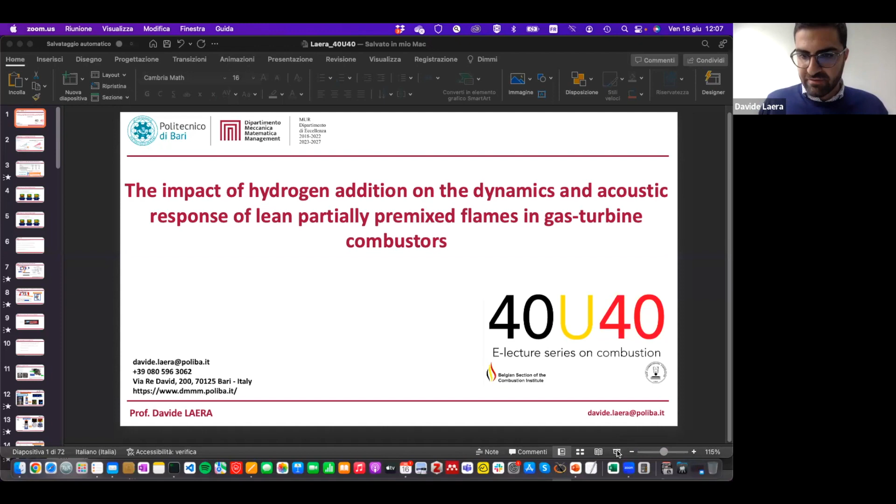Before starting sharing my screen, I would kindly thank Alessandro and Bart for the invitation for giving this seminar. So tell me if everything is all right. I'm sharing the screen, do you see one screen? Yep, everything's okay, audio is okay? So far, so good. Perfect, so I think we can start.

Good morning everyone. As Salvatore said, I'm going to present you 50 minutes of talk on the impact of hydrogen addition on the combustion dynamics and acoustic response of lean premixed, partial premixed flames in gas turbine combustors. So briefly, we are going to talk about thermoacoustics today.

I don't think I have to really tell you why nowadays we are talking about hydrogen combustion. If we see the plots on the prediction of the emission of greenhouse gases, which you can easily find online, with a focus on aviation or global emission, you can clearly see that if we want to meet the carbon neutrality European target by 2050, we definitely need a change of paradigm in combustion systems. We need really to reach carbon neutrality.

One way to do that is to move to a carbon neutral fuel such as hydrogen, considered nowadays one of the most promising solutions. The problem is that if we compare the thermochemical properties of hydrogen with classic hydrocarbons used in gas turbine systems, such as methane or kerosene, we can clearly see that hydrogen has completely different properties. In particular, hydrogen is characterized by high flammability limits, higher chemical reactivity, meaning higher flame speed, and low density. This introduces a technology challenge.

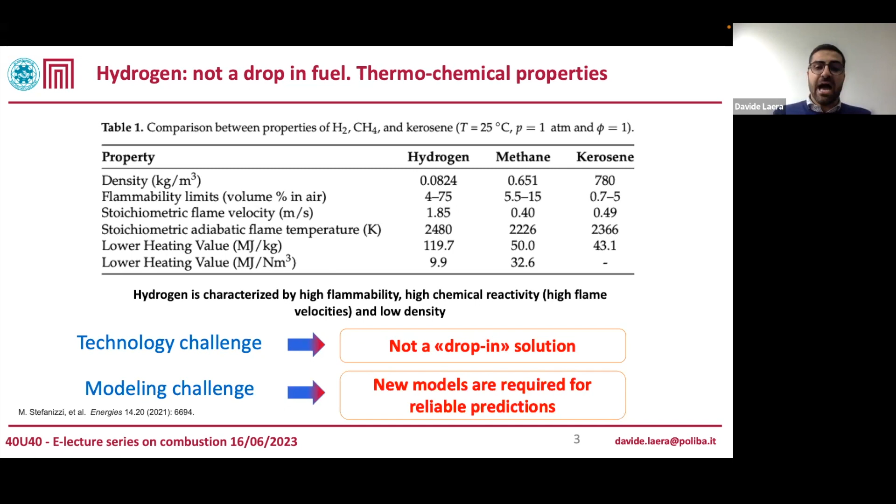Hydrogen is not a drop-in solution. For people like me who have spent my career doing modeling and simulation, the fact that we want to modify the fuel and use hydrogen in a combustion system will also introduce a modeling challenge. So new models are required to be developed in order to have reliable predictions. In general, hydrogen is not a drop-in solution.

So what will be the impact on an engine if you use it? Definitely we are going to have modifications in the flame shape, thermal load, and emissions. We need to rethink ignition problems, LBO or flashback, and also some instability problems of the flame, such as thermoacoustic and intrinsic instabilities. Of all these problems, today's talk will focus on thermoacoustic instabilities.

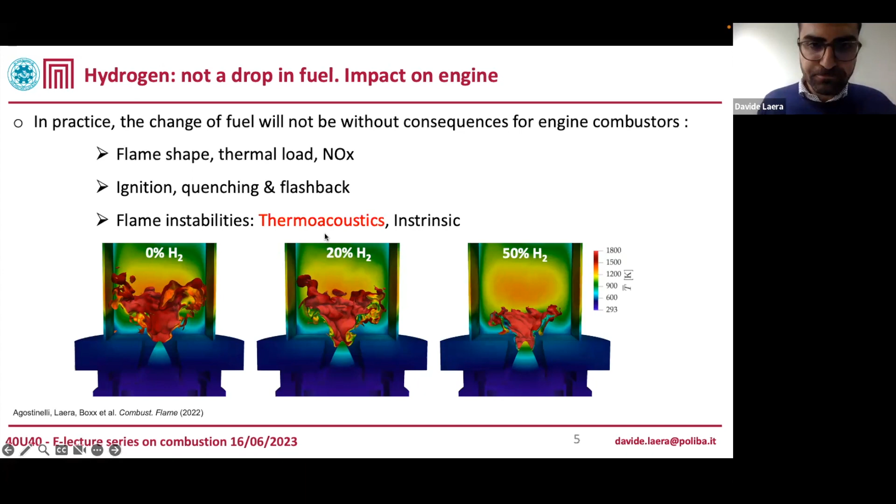So this is the outline of my presentation. First, I will briefly do a theoretical recap on what thermoacoustic instabilities are, a really peculiar problem of combustion systems. Then I'm going to focus on the use of large eddy simulation as a predictive tool for thermoacoustic instabilities. The focus here will be more on which are the challenges and what are the requirements for an LES to be a good predictive tool for combustion instabilities.

I'm going to present a couple of simulations that I performed when I was at CERFACS, on two different test rigs: the premixed combustor from DLR and the Miradas MFT, where these two test rigs have not been operated with pure hydrogen conditions, but where hydrogen was added.

The focus will be on the impact on combustion dynamics of adding hydrogen. Then some final remarks and ongoing projects.

So, thermoacoustic instabilities. In order to explain thermoacoustic instabilities, let's first consider a sketch of a gas turbine combustor. In this sketch you will have a plenum, an injector, a combustion chamber with a flame. Let's imagine that for some problems, we have heat release rate fluctuation, so an unsteady combustion process inside the combustion chamber.

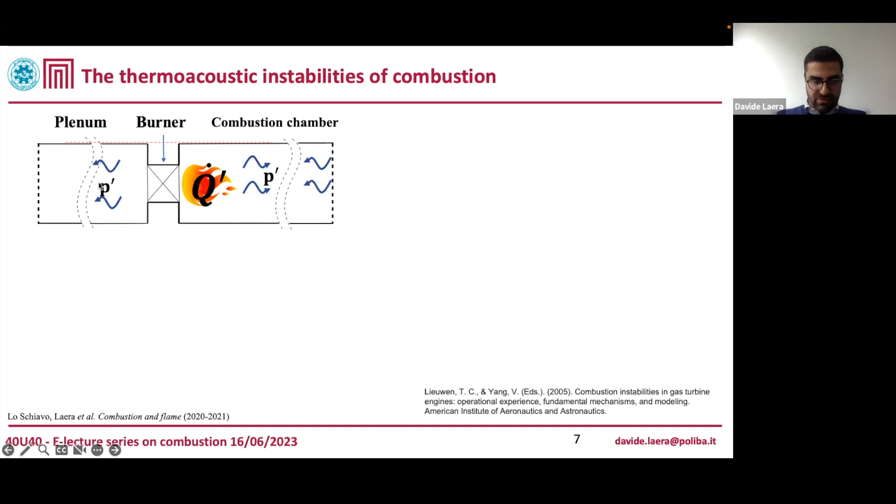When you have heat release rate fluctuation, what will happen is that you will generate acoustic waves. These acoustic waves will propagate downstream and upstream of the combustor in the plenum and the combustion chamber, will encounter the outlet and the bounds of the combustion, and will be reflected back in the combustion zone.

The acoustic wave here may directly or indirectly interact with the combustion process. Then new heat release rate fluctuation will be generated, and this system may self-sustain, leading to thermoacoustic instabilities.

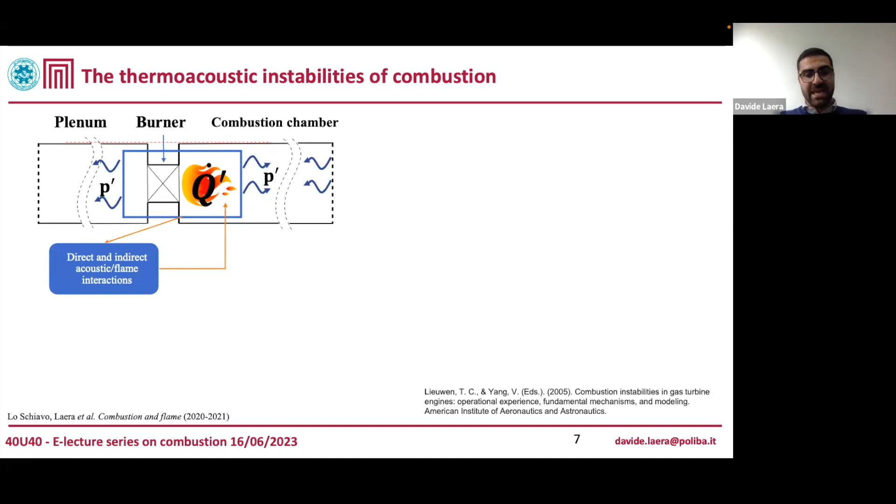Let's now have a focus on how the acoustic wave can interact with the combustion process. Here I'll talk about direct and indirect acoustic flame interaction. We can mention some of the mechanisms. For example, we can consider that the acoustic wave will impact the injection and the mixing system.

For example, in a perfectly premixed flame, the presence of acoustic wave may lead to mass flow oscillation, which will result in oscillation of the heat release rate.

For a partially premixed or technically premixed flame where air and fuel are injected separately, the presence of acoustic wave may lead to fluctuation of fuel and air mass flux, generating equivalence ratio fluctuation, which will lead again to heat release rate fluctuation.

In a system where we have a spray, so when we operate with liquid fuels, what may happen is that the acoustic waves may couple with the evaporation process of the liquid droplets and again generate heat release rate fluctuations.

Today, I'm not talking about liquid fuel. Interested people can have a look at a couple of recent publications that we have performed on spray flames and thermoacoustics. Here I put the reference.

The acoustic waves can also interact directly with the flame itself, for example, leading to flame surface variation. That, as you all know very well, if you are...

...proficient in combustion, this will lead to fluctuation of the heat release rates, or may couple also with the hydrodynamic fluctuation of the system, which may then interact with the flame, generating, for example, vortex and flame interaction, flame tip roll-up.

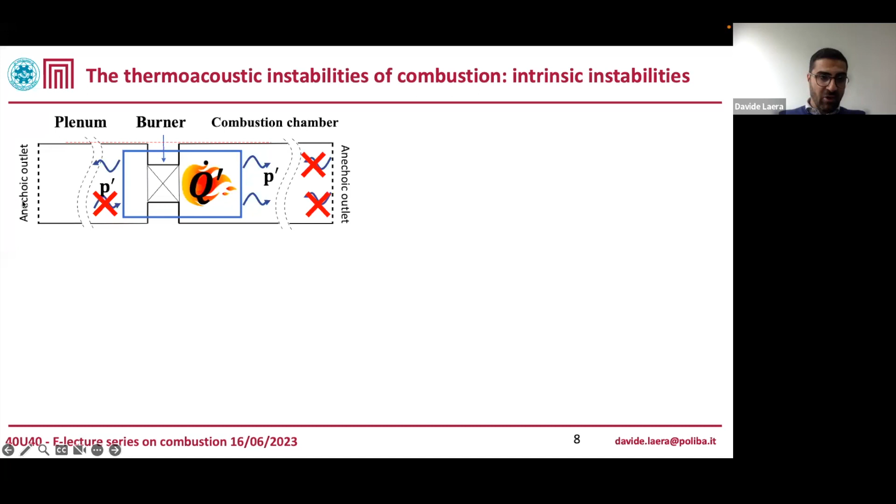...you have an anechoic outlet, and that is because basically the loop of acoustic wave flame interaction happens inside the flame itself. The acoustic waves that are generated by the flame will propagate upstream.

They will encounter the injector, and they will be reflected directly back on the flame. This may generate some acoustic instability that does not depend on the geometry of the system, so that's why they have been called...

...intrinsic instabilities. This phenomenon has been almost discovered at the same time by researchers from TU Eindhoven and from Munich.

Interested people in these interesting thermoacoustic instabilities may refer to a very thorough lecture that has been presented by Professor Polifke, which I moderated during the combustion webinar organized by Georgia Tech. I leave you here the link of the recording, the YouTube link. And very recently, Dr. Silva from TU Munich has published a comprehensive review on such phenomena.

In this talk, I'm not going to talk about intrinsic thermoacoustic instabilities, but instead I'm going to talk about classic acoustic-driven ones.

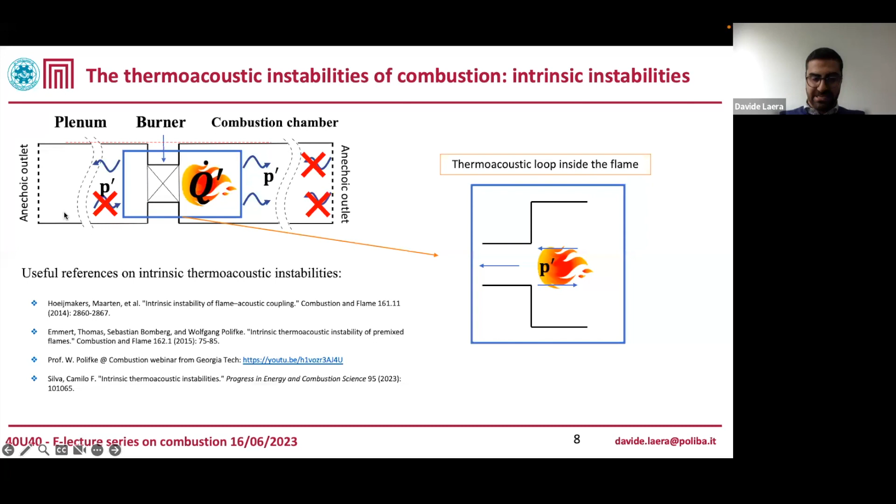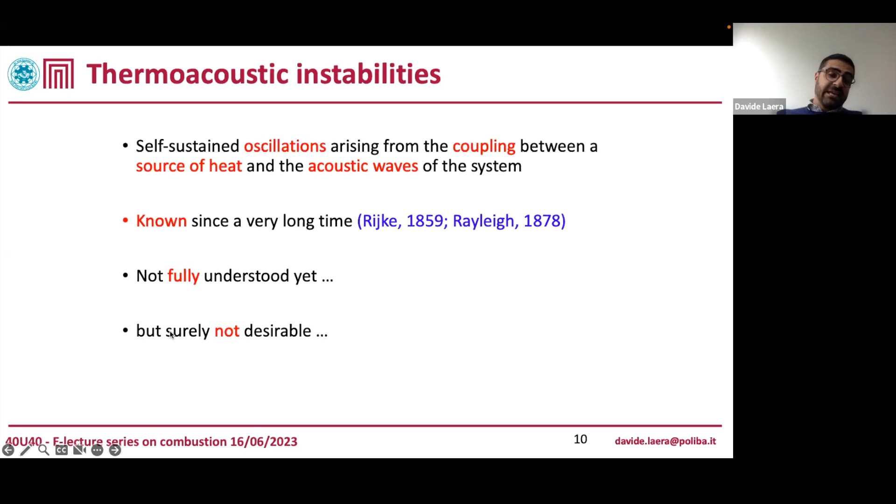That is because what are the harms of combustion instabilities? Combustion instability is definitely a source of combustion noise, not the only one, but the most important one. They may generate high levels of pressure fluctuation that will cause structural vibration, component failure, as you can see here, or they may lead to unwanted combustion instability phenomena such as flashback and blow-off.

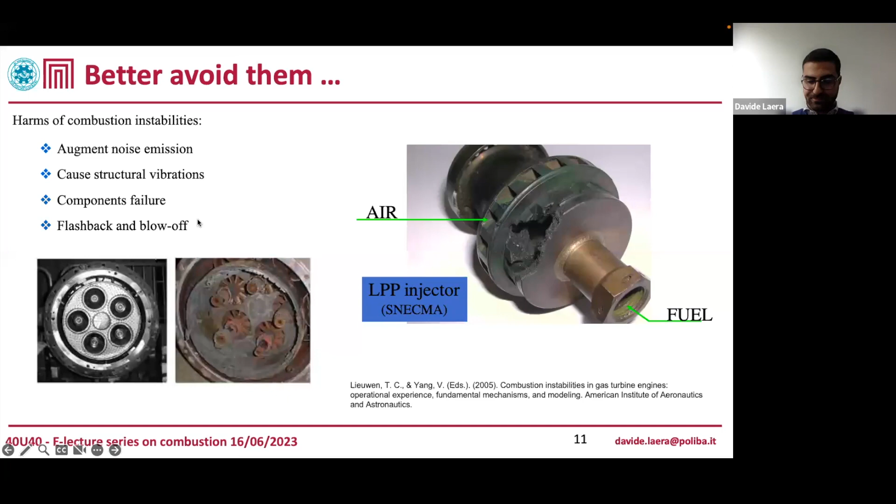So the question of today is: what happens if now we add hydrogen in our system? During this talk, I'm going to present two configurations in which hydrogen has been added, but in a completely different manner.

The first one is the very famous PRECCINSTA combustor from DLR, where very recently Isaac Boxx and Ianko Chterev have performed some hydrogen testing campaigns. In the PRECCINSTA combustor, the hydrogen has been added fully premixed with the methane upstream of the combustor. Basically, inside the combustor, the methane and hydrogen are injected upstream, then mixing up and a partially premixed flame is stabilized inside the system.

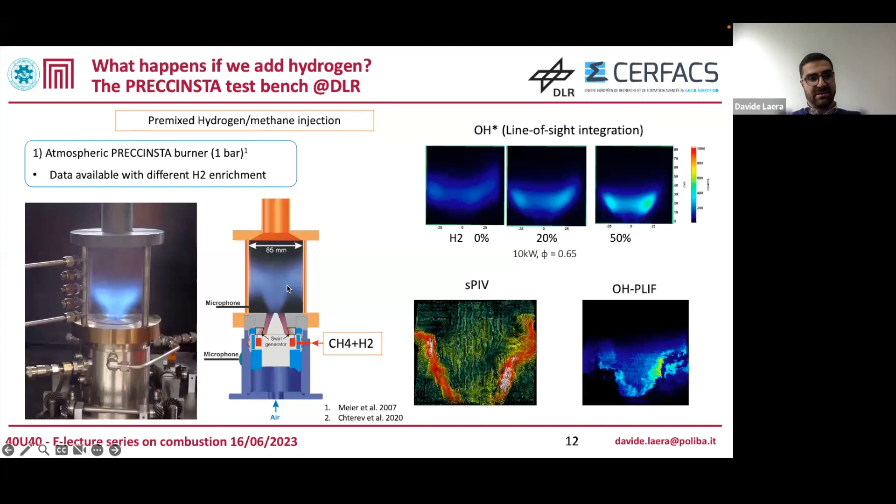The problem is that in the PRECCINSTA combustor, as soon as hydrogen reaches the combustion chamber, a thermoacoustic mode is triggered, as you can see from this simulation. We're going to discuss this later on in the presentation.

The second test rig that I'm going to talk about is the MIRADAS test bench, which has been designed, operated, and developed at IMFT in Toulouse in the framework of the SCIROCCO ERC project. Why is it interesting also to discuss the MIRADAS test bench?

This is because, differently from the PRECCINSTA combustor, here hydrogen is not injected fully premixed with methane. Instead, there is a pilot line of pure hydrogen; a really small quantity of hydrogen is injected at the base of the flame root through this pure hydrogen pilot line. So in this case, hydrogen is not premixed and is injected at the flame root.

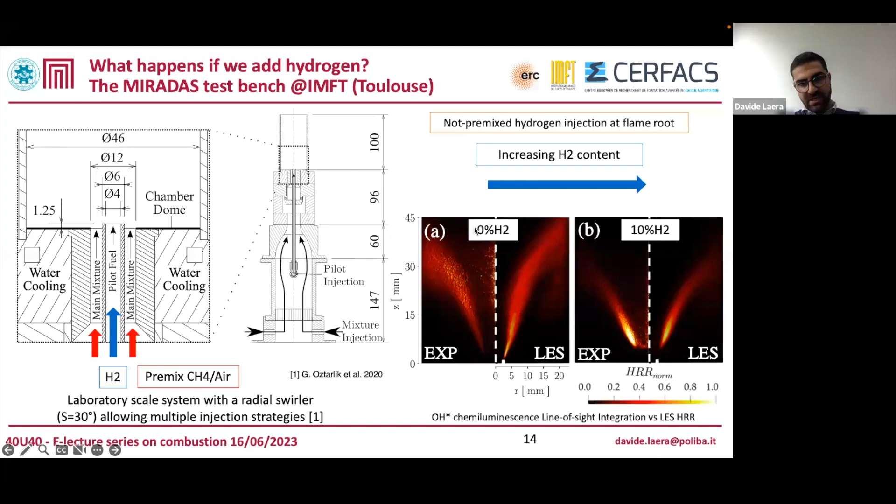Here you can see what happens at the flame when we pass from 0% hydrogen—this is the pure methane case—to 10% of hydrogen at the flame root.

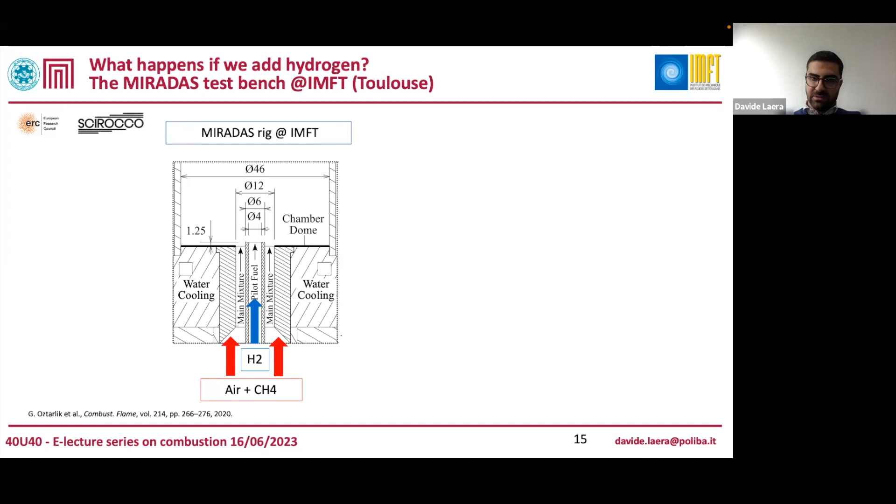If we now talk about instabilities, I have a video that I think we can stop here.

So as you have seen, we have an unstable flame when operated in pure methane, that is stabilized as soon as a little amount of hydrogen is injected at the flame root.

What you can see here is that in both test rigs, hydrogen has been added. In one case, hydrogen led to the triggering of instabilities. In the other case, hydrogen helps the stabilization of the flame. So what is happening here?

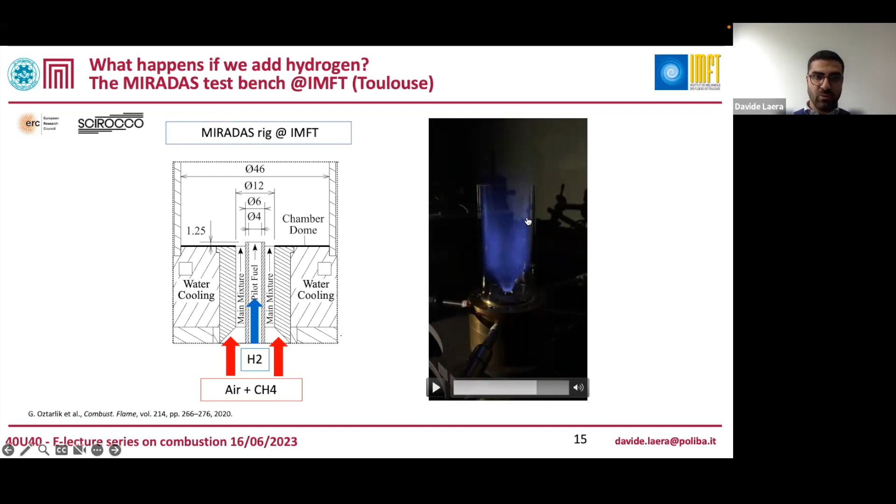If we want to study this problem from a numerical point of view, a modeling point of view, it is a quite challenging problem. That is because thermoacoustic instabilities, if you have correctly understood, is a multi-physical problem. You have to deal with acoustics, fluid mechanics, combustion, and dynamical systems.

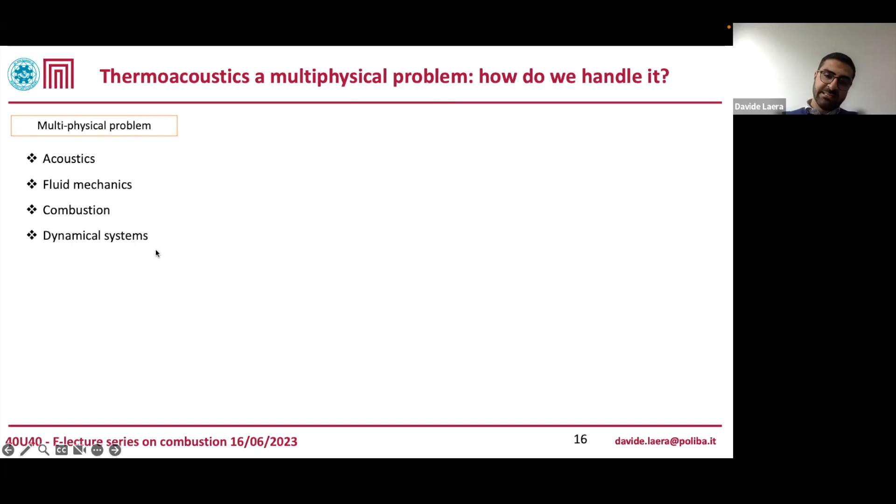Over the years, multiple approaches have been developed in order to study thermoacoustic instabilities, and they can be grouped into two major groups. The first is the acoustic approach, where we study the problem from the acoustic point of view using an acoustic solver, where we can use 2D or 3D modeling—that's not important, the concept is the same. We solve the acoustics, and the flame inside these models is considered as an acoustic element, only considered as a source of acoustic waves.

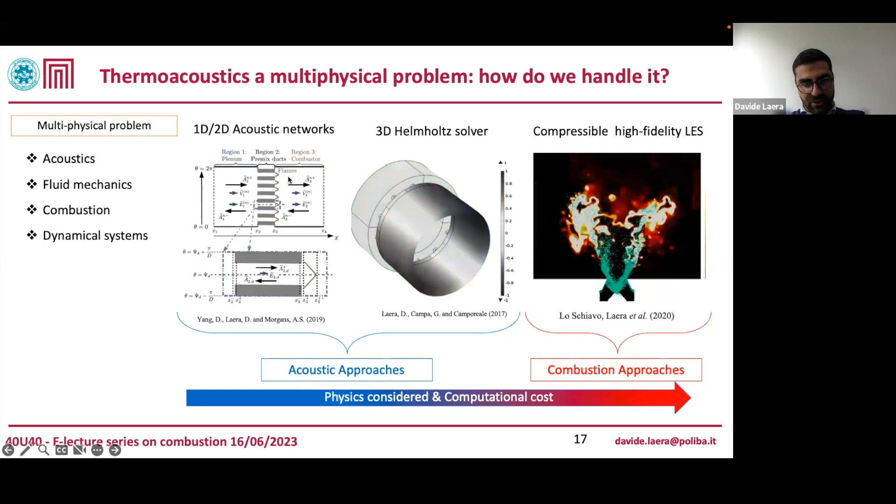On the other hand, we have compressible LES simulation that can capture all the physics that I've listed here, of course at the price of a higher computational cost. Today, we are not talking about the acoustic methods, which was the objective of my PhD thesis at Polytechnic University of Bari, but we are going to focus more on how LES simulation can be used to study thermoacoustic instabilities.

All the simulations that I've performed today have been performed using the high-fidelity compressible solver AVBP, which is quite famous in the community. It's developed at CERFACS, and it resolves the reactive, fully compressible Navier-Stokes equations with a high-order Taylor-Galerkin scheme, and it's been used for combustion problems, including thermoacoustic instability studies.

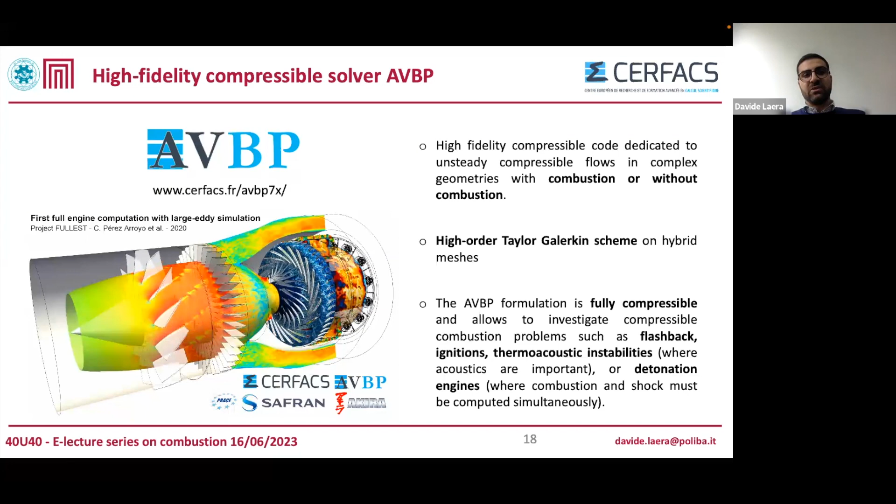Now, in an LES solver, if we want to understand which are the requirements needed in order to perform such studies, the first thing that we need to deal with is how do we account inside the solver for the chemical reactions, the chemistry.

Generally, we can classify the approach into groups: the flamelet generated manifold, or tabulated approach, where chemical reactions are pre-computed, tabulated as a function of, for example, a progress variable, and stored in tables recalled inside the system. Codes using this approach are computationally cheap, because you only need to resolve one more transported equation, that of the progress variable and its variance. The problem is that when you pre-compute the chemistry, you make strong assumptions.

For example, in the combustion regime, when you add hydrogen, as we will see in the Miradas combustor, we are going to face multiple combustion regimes where you have diffusion and premixed flame. So this can be a drawback. Furthermore, to consider complex effects such as heat transfer or stretch effects, these need to be computed in the tabulation that you perform.

Another approach, the one used in AVBP, is the finite rate chemistry approach. In a finite rate chemistry approach, you resolve directly the chemical reactions while computing the simulation, so the combustion regime, the enthalpy effect, the stretch effect are an output of the simulation. The problem is that since you have to add a transport equation for each species in your chemical scheme,

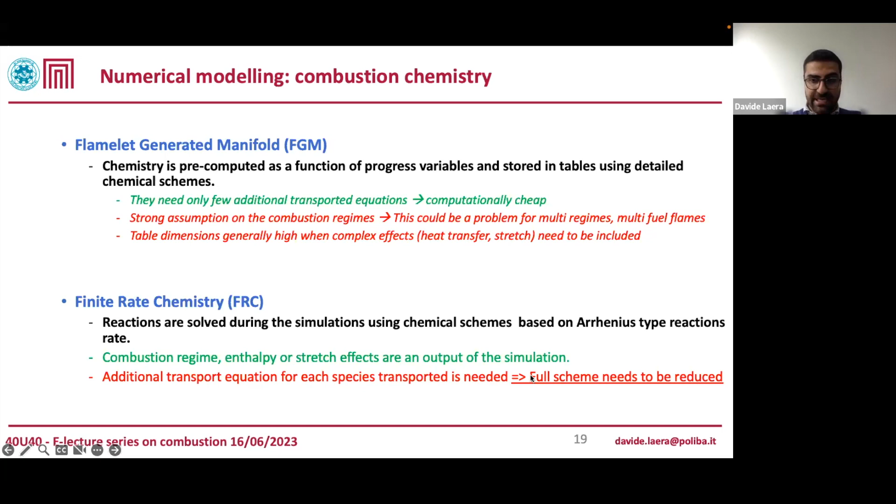you cannot use the detailed scheme. You need to reduce the chemical scheme that you require. So, in order to perform blends, hydrogen, hydrocarbons, methane simulations, one possible approach is to use a reduced scheme. This is the scheme that has been used for the calculation I'm going to present today.

It has been derived using the CERFACS-developed ARCANE tool. I leave here the references for interested persons. This scheme has been derived starting from the detailed POLIMI scheme developed by the CREC group in Polytecnico di Milano, which comprises 159 species and more than 2,000 reactions.

The reduced scheme at the end of the reduction process comprises 15 transported species, 9 in QSS, and 138 reactions. It has been validated for a range of premixed flames ranging from pure methane up to pure hydrogen, but here we go to 20% CH4 and 80% H2.

The second point that you need is turbulent combustion modeling. That is because in a premixed flame, in order to achieve stability in a code, if you have a finite rate chemistry approach, you need sufficient points to resolve the thickness of your premixed flame.

The point is that when you add hydrogen, the thermal thickness of your flame becomes shorter, so this may become computationally demanding. So you need a model.

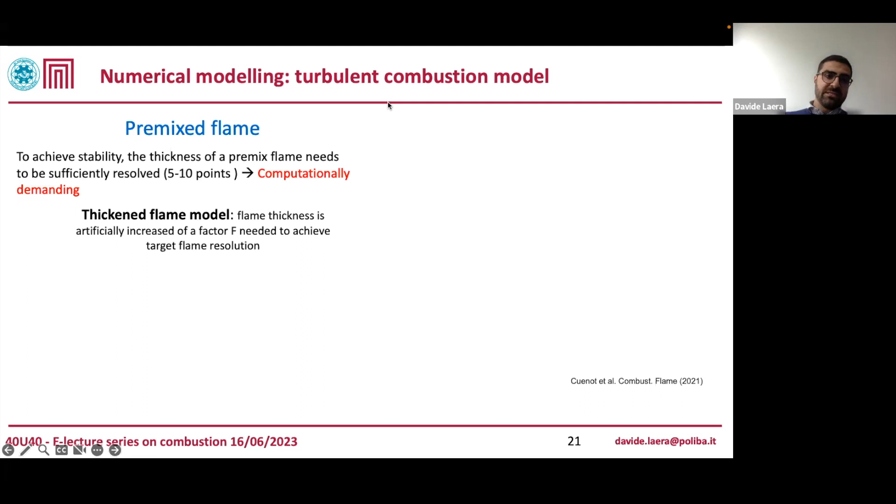The model that we use is the very famous thickened flame model. The thickened flame model basically uses properties of premixed flames, which say that the laminar flame speed is conserved if you divide the pre-exponential factor, so you divide your reaction rate by a factor f, and you multiply your diffusion coefficient by the factor f. You conserve the laminar flame speed, and you thicken the flame by the same factor f.

The problem is that an efficiency function needs to be introduced in order to correctly capture the flame-turbulence interaction, because you thicken your flame, so the response of your flame to the turbulence will be modified. This model is really famous right now. It's been implemented in multiple CFD codes, such as YALES2, OpenFOAM, Converge. You can find it everywhere.

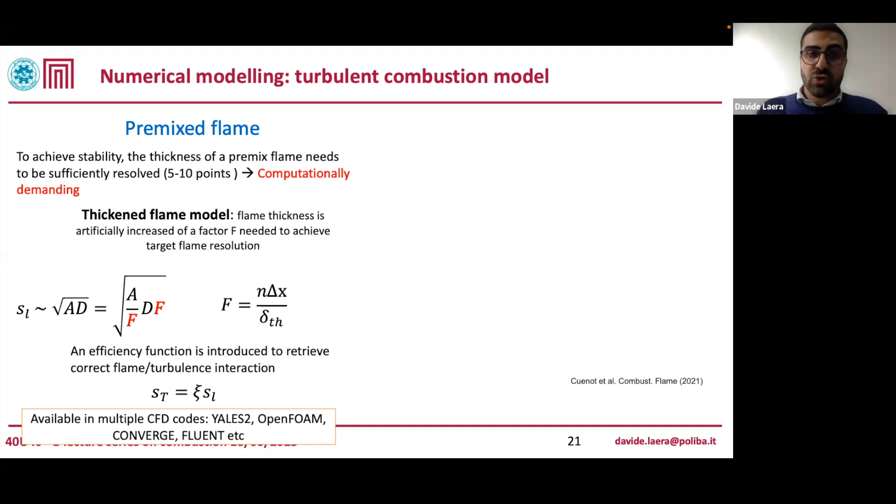As I said before, we may encounter multi-regime combustion, so we need to address diffusion flames as well. Diffusion flames, from a computational point of view, are less demanding. That is because the thickness of a diffusion flame will depend on the resolved velocity gradient on which you solve it. This means you don't need to thicken a diffusion flame because the flame will automatically adapt to your mesh.

The problem is that the reaction rate will depend on the scalar dissipation rate, so an under-resolved diffusion flame will lead to errors in your heat release rate. The solution is either to introduce turbulent combustion modeling for diffusion flames or to impose finer resolution.

In the simulation we're going to present today, we use the first approach. We detect the flame region using, for example, a Takeno sensor, and we apply the respective modeling, premixed flame model or diffusion flame model respectively, and then we choose the data at our disposal to validate our simulation.

When you're going to deal with hydrogen, you of course need to take really careful attention on transport properties. We all know very well that hydrogen species diffuse very fast. They have hydrogen characterized by a Lewis number that is of the order of 0.3 to 0.4.

So this means that you cannot do as you are used to doing with the methane flame, using the Lewis equal 1 approach. You need, for example, to account for differential diffusion of the species.

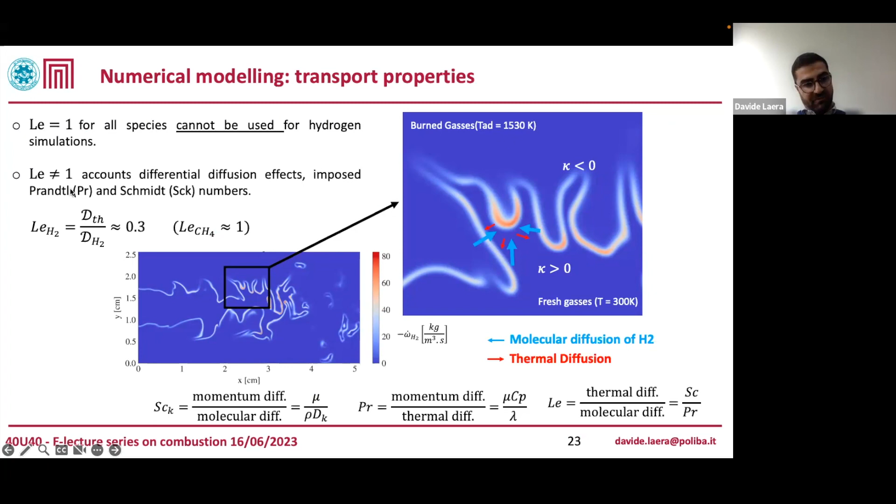...will change. So when tuning, as I said before, tuning your Prandtl number in order to match the correct value will work if methane and hydrogen are injected fully premixed.

But if they are injected separately, the transport property will depend on the local composition. Here you have two options: either use a full complex transport properties in your code, of course at the price of extra computational effort, or you can, as we have done in this publication, think of a simplified complex transport approach.

based on mapping, so mapping the value of Prandtl and Schmidt number of selected species as a function of local composition. The impact of this may be huge.

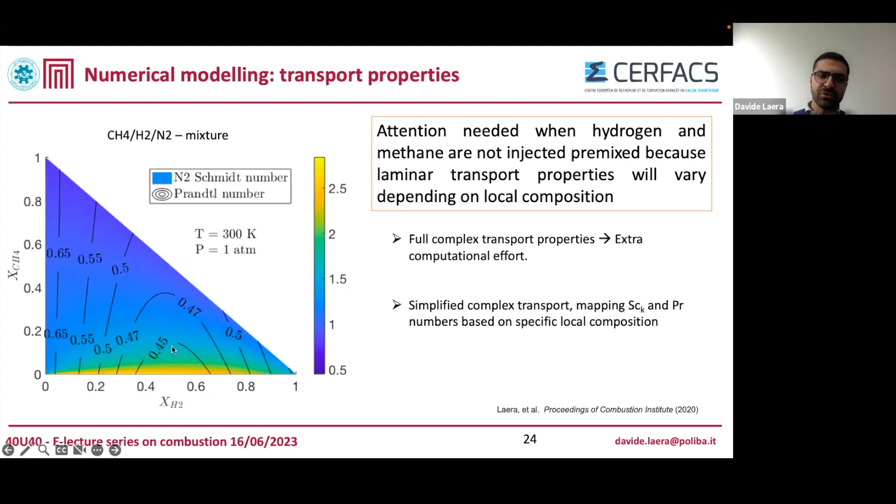For example, here are some results that show the variability, for example, of the Prandtl number in the Miradas combustor, where you have here hydrogen air, methane air, and the hydrogen is injected. As you can see, the variability of the Prandtl number is quite huge.

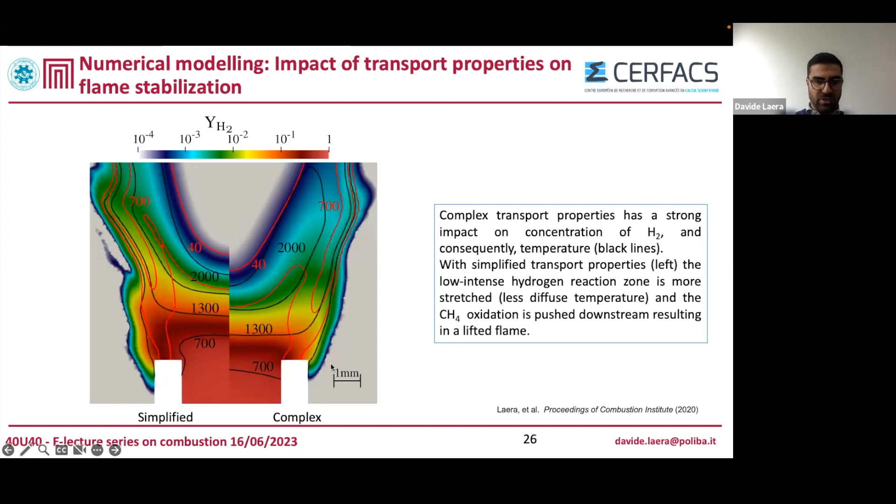Once we have fixed the combustion modeling, now we need to talk about boundary conditions. Generally, for LES or compressible solvers, we use a non-reflective boundary condition that has been derived by this famous paper from Poinsot and Lele.

When you don't want to deal with thermoacoustics, what you do with non-reflective boundary conditions is basically tune the parameters of your non-reflective boundary condition in order to...

...guarantee an anechoic boundary condition, so to avoid reflections inside the computational domain and guarantee stability.

When you want to study thermoacoustic instabilities, you cannot do that, because you need to have a reasonably correct acoustic impedance, because you need to capture correctly the acoustics of your system.

So if you use a non-reflective boundary condition like NSCBC in a compressible solver for self-sustained limit cycle calculation of thermoacoustic instabilities, be careful of the value you use for the relaxation coefficient, because, as has been proved in this publication from Selle, Poinsot and Nicoud...

...this will modify the acoustic impedance of the boundary condition. So you may modify the acoustics of your system, leading to wrong thermoacoustic predictions.

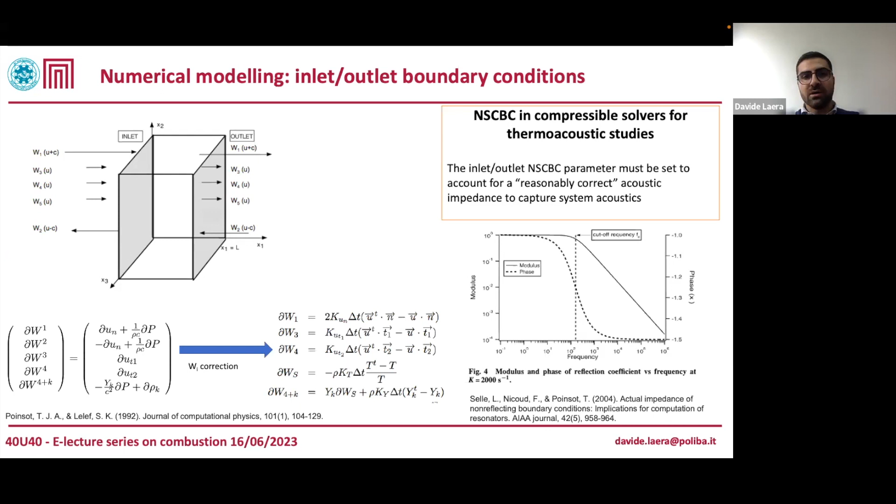Another key point for LES is the thermal boundary condition. So as you may know, for thermal boundary condition, we have multiple strategies. Okay, we can use adiabatic walls.

This is wrong, so it should clearly be avoided. We can impose the wall temperature at the wall.

So basically, in configurations where we have measurements, we can directly impose the temperature at the wall. The problem is that generally you do not have measurements in all your configurations, so this will work only on limited operative points.

Another possible solution to this problem is, instead of imposing temperature, to impose a heat resistance. Basically, with the heat resistance, you take into account the resistance of the heat conduction, convection, and radiation processes. So you do not impose directly the temperature, but the resistance at the wall.

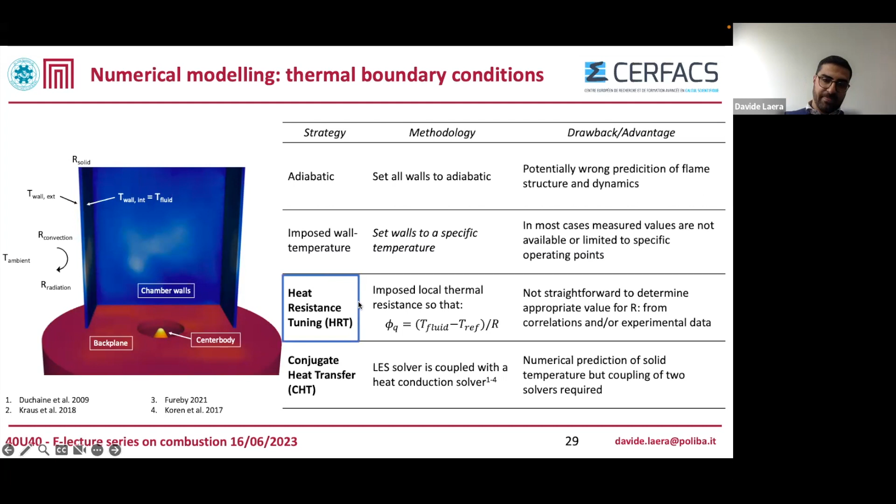If you hypothesize that the heat resistance will not change with temperature, you obtain a condition that does not depend on the specific operative condition at which you derived it. Of course, the last hypothesis is to perform a coupled conjugate heat transfer calculation. Today I'm going to talk about studies we have performed using these last two approaches.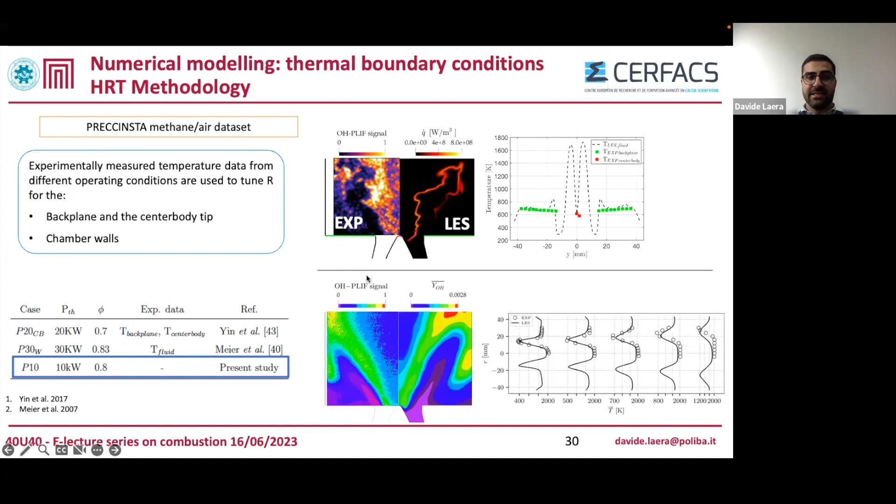Then we performed the simulation at the 30 kilowatt point, where we had temperature measurements on the wall, and we used this to compute the correct heat resistance for this boundary condition. Once we had that, we applied the two resistances in a third case where we had no measurements at all.

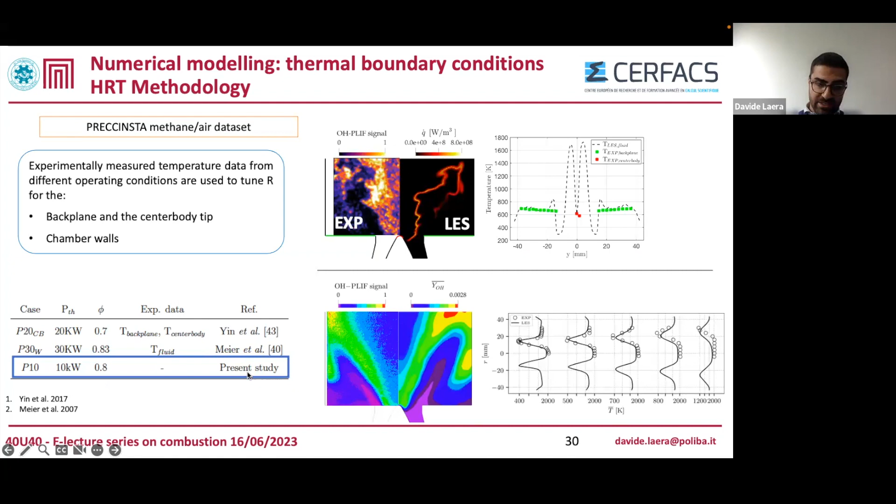As you can see, the application of the thin thermal resistance led to a flame shape that is reasonably matched. There are some mismatches—for example, it's a little bit shorter than the one observed experimentally.

Now, if you are not interested in thermoacoustic instabilities, your study ends here. The problem is that we were interested in thermoacoustic stability, so we had to see what was the impact of this thermal boundary on the system dynamics.

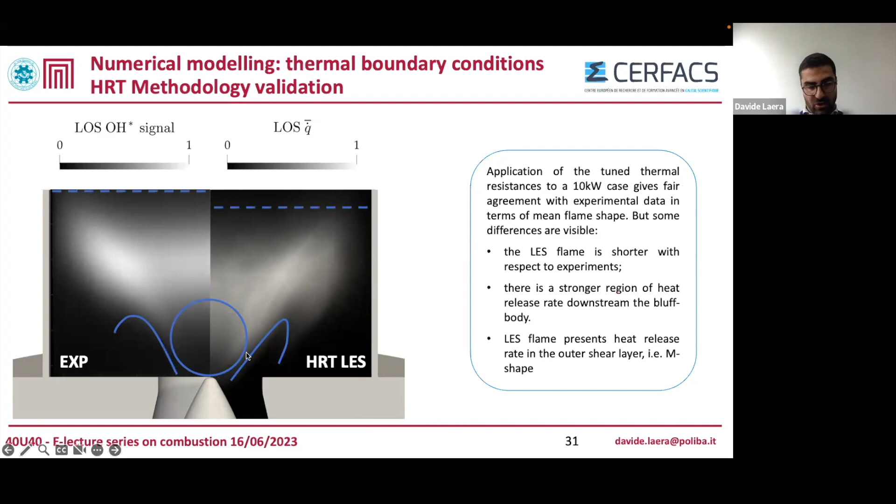What we observed was that when we imposed the heat resistance, a thermoacoustic mode was triggered, and this thermoacoustic mode was purely numerical. During the experiment, they didn't measure any dynamics at this operating point.

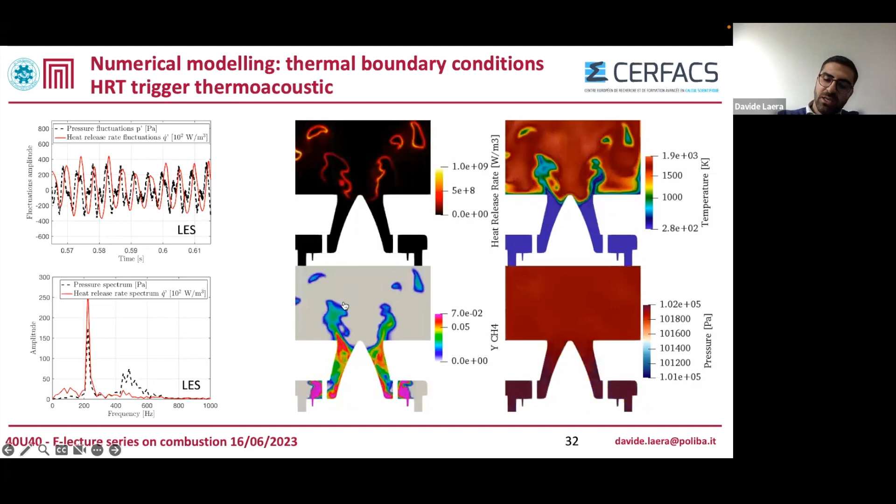When we switched back to a CHT calculation, magically, the thermoacoustic mode stabilized.

So the takeaway message here is that in order to perform thermoacoustic instability simulation with an LES, you need to be very careful with your combustion modeling and boundary conditions, including the thermal boundary condition, because wrong modeling in these three fundamental aspects may lead to unphysical results and the triggering or stabilization of thermoacoustic modes only because of the model.

This said, let's talk a little bit about physics. The first case I'm going to present is the premixed combustor. Here I'll report a list of articles in which basically all the results I'm going to present today have been published.

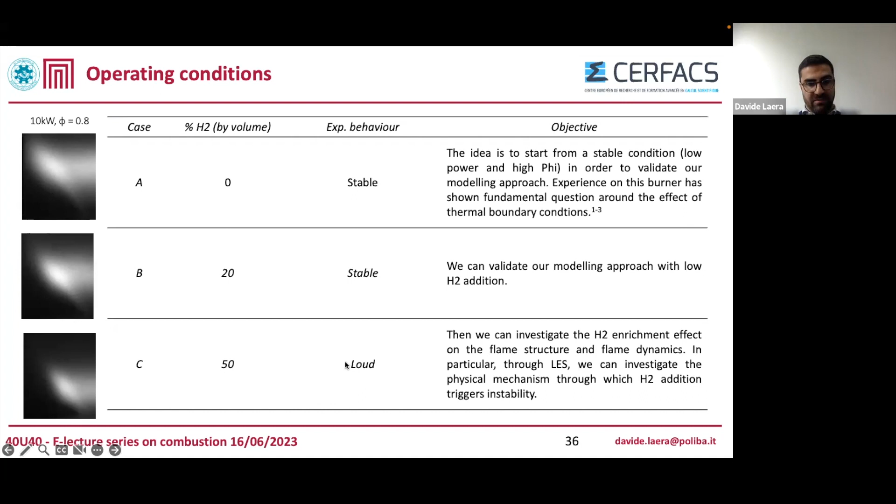The computational domain used for this simulation is shown here. I want to point out one thing: in order to correctly capture the acoustic impedance at the outlet of the system, a portion of the atmosphere was included inside the computational domain. This allows us to place the outlet boundary condition here, and not at the original outlet.

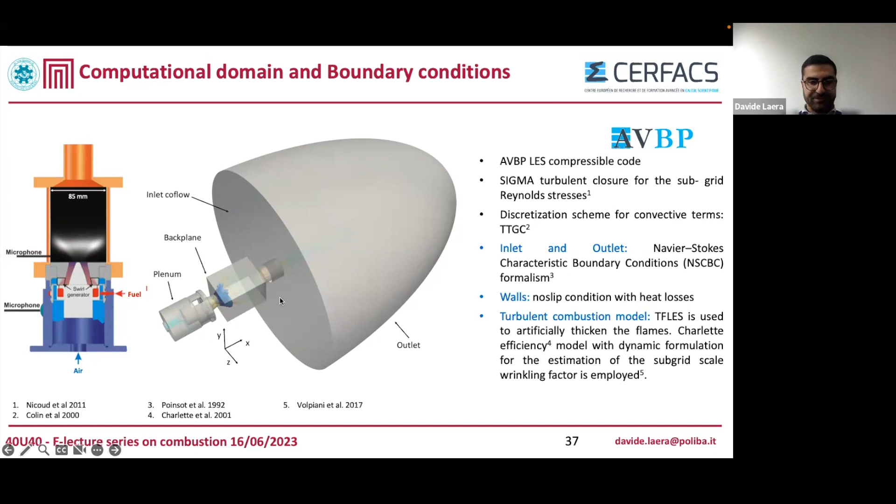I'm not going to talk about this in detail, but in order to reduce the computational cost required for this calculation, you can optimize your computational mesh using mesh refinement techniques, as we have done here for the premixed case. We used static mesh refinement techniques. More information can be found in the publication by Dr. Agostinelli.

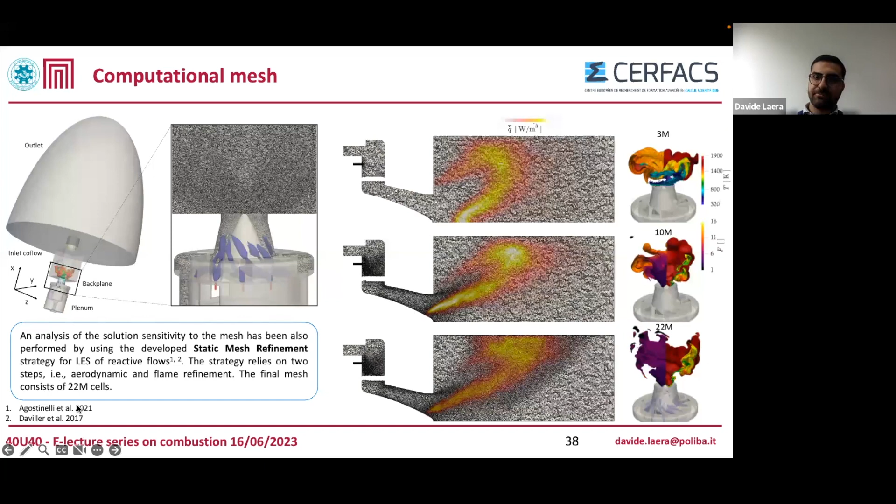Before talking about instabilities, you need to be careful and sure to have a stable flame. Here you can see we make full use of the really high quality data set measured at DLR, which we used to validate our simulation. As you can see, we had a perfect match of our velocity profile and also of our flame shape.

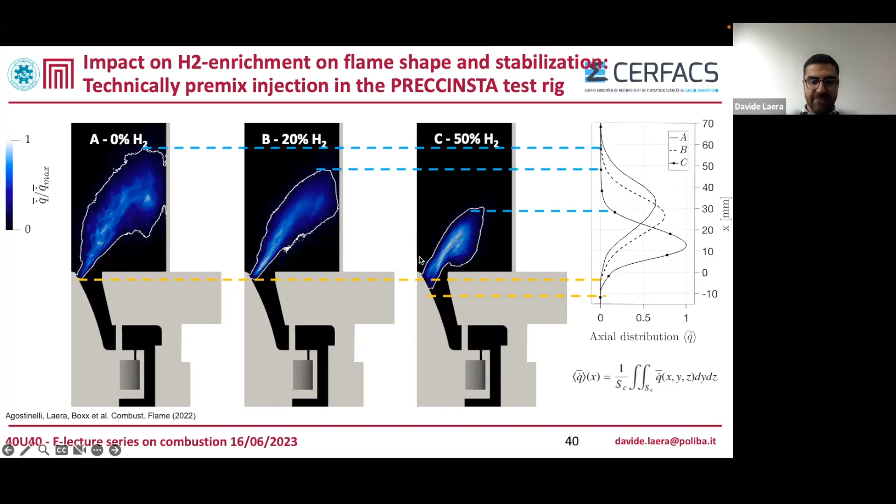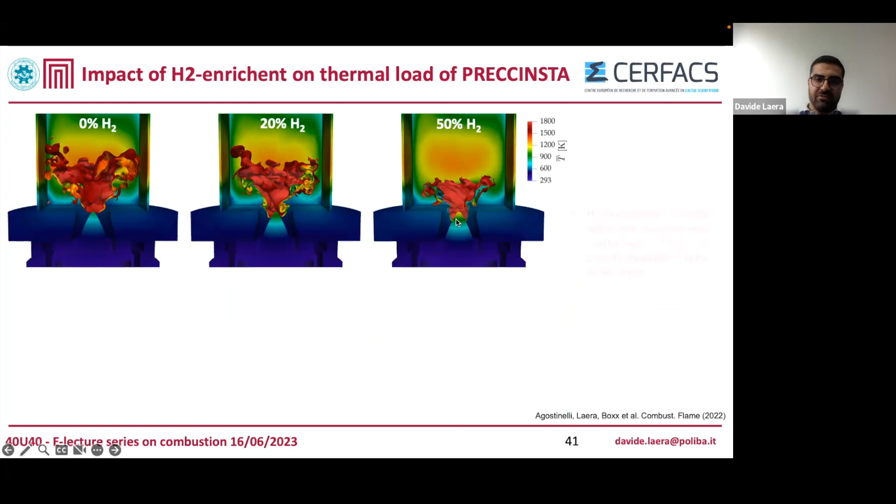When hydrogen is added, the flame gets shorter, more compact, and stabilizes closer to the flame holder here, the central body. The CHT simulation gave us the possibility to account for the heating up of the central nodes, due to the fact that the flame stabilized closer to the flame holder, which reaches temperatures up to 1200 K.

As soon as hydrogen is injected, a strong limit cycle has been observed during the experiment. Analyzing the spectrum of the pressure signal and the heat release signal, what you can see is that the limit cycle triggered is a bimodal limit cycle characterized by two main frequencies: one around 280 Hz, which has been observed only in the pure methane premixed dataset, for example in the studies of Meier, and a higher frequency mode at 470 Hz that has been properly observed only in this testing campaign with hydrogen.

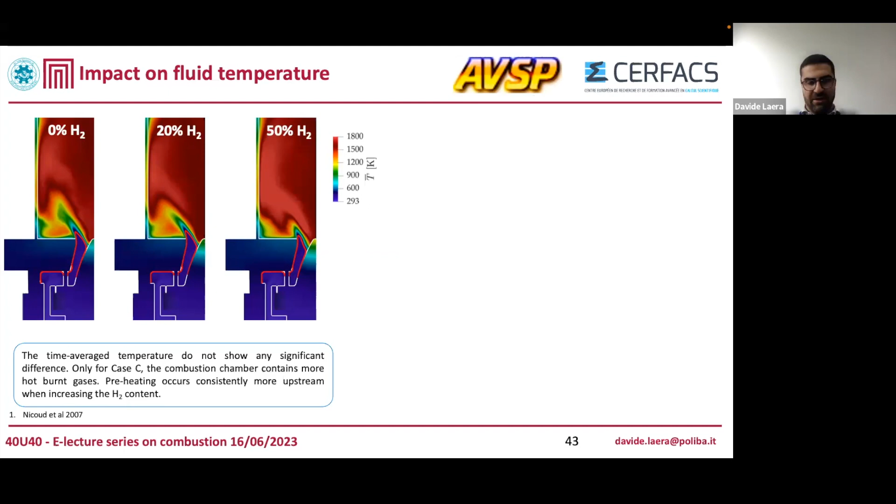The first thing we did was compute and characterize these two modes. One way to characterize the mode is to perform an acoustic simulation using, for example, a Helmholtz solver. Here we used AVSP, but similar calculations can be done with any Helmholtz solver available online, for example multiphysics or an in-house solver.

What we observed was that adding hydrogen to the system only slightly modifies the temperature field, because the flame is more compact and stabilized closer to the system. So you can see that in this outer recirculation zone, the temperature is higher, but the impact on the acoustic mode is very limited.

That's because the impact of temperature inside the acoustics is under a square root, so the pure acoustic modes of the chamber are not impacted by the addition of hydrogen. The two acoustic modes around which instabilities have been observed can be found in all three configurations: one mode at around 280 Hz, the so-called Helmholtz mode, and a second mode at 486 Hz, the first mode of the combustion chamber.

So if hydrogen does not change the acoustics of the system, it will definitely change the response of the flame. The reason why adding hydrogen made the system unstable could be the response of the flame directly, and not a modification of the system acoustics.

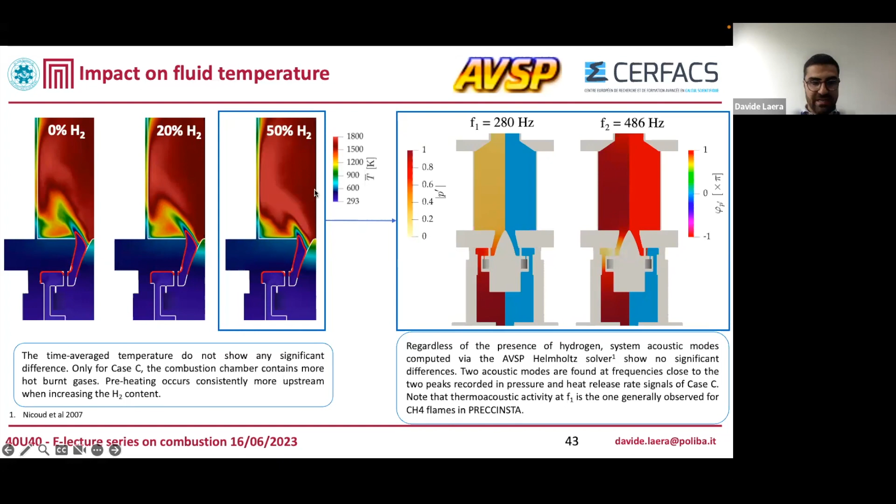During the limit cycle, the length of the flame changes, as does the flame surface. The flame will be elongated and pushed further inside the system during the limit cycle. Also, the stabilization point of the flame on the center body modifies during the limit cycle — it goes up and down, following the movement of the flame.

You can clearly see, and we'll discuss this in further detail, some flapping oscillation of the jet, because the fuel here is injected down here, and along the limit cycle, this jet flaps following the oscillation, leading to further pockets of fuel that are convected inside the flame zone, causing heat release rate oscillation that sustains the limit cycle. You can also see a strong interaction of the flame surface with the vortex shed by the injector at the injector plane and exit, leading to variation of the flame surface due to the flame roll-up mechanism.

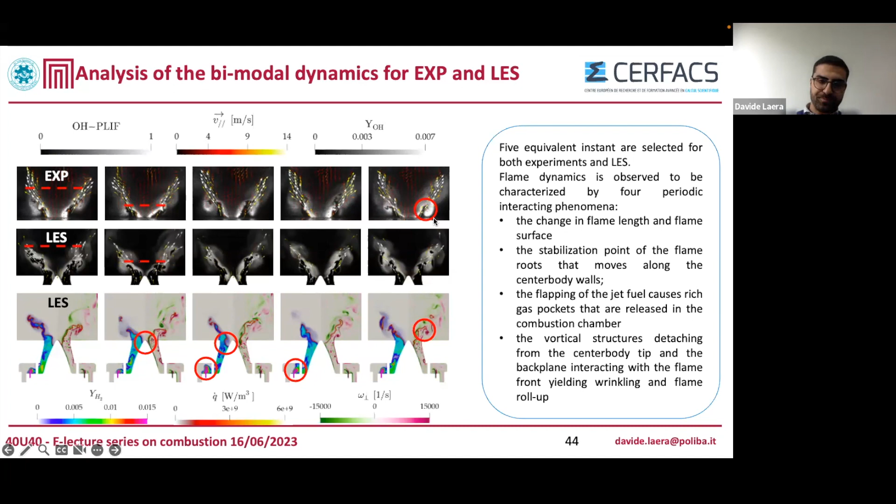As I said before, the mode that we observed in the PRECCINSTA is characterized by two frequencies. So we can further exploit the LES using some projection techniques in order to extract the component of the two modes of the system. In particular, here we have used DMD analysis to extract the pressure fluctuation, heat release fluctuation, fuel fluctuation at the 280 Hz and 486 Hz components of the oscillation.

In this plot, what we have plotted is the so-called Rayleigh index. The Rayleigh index is an index very famous in thermoacoustics that basically compares the phase of the fluctuation of heat release rate and pressure fluctuations.

A positive Rayleigh index means that the two fluctuations happen in phase, so the two oscillations drive the instabilities. Otherwise, a negative value of the Rayleigh index means that the two oscillations happen out of phase, so in this point, the oscillation operates to stabilize the instability.

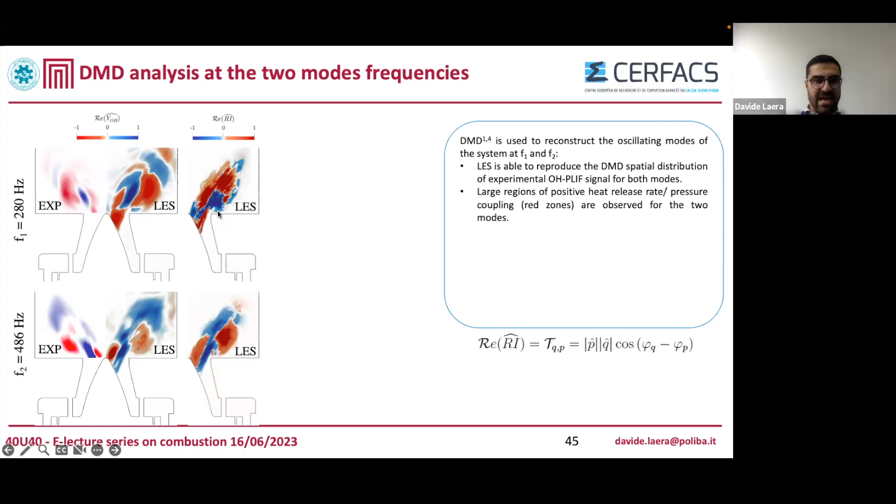Of course, in an unstable flame, the zone driving the instabilities should be larger than the zone controlling and damping the instabilities, and this is the case for both oscillations, for both modes, for both components of the oscillations.

We have done the same also correlating the fluctuation of the mass fraction of hydrogen with the fluctuation of pressure. This is because we wanted to check the zone where the oscillation of fuel happens in phase with the oscillation of pressure. As you can see from these results, in both modes, the oscillation is supported by equivalence ratio oscillations that happen in phase with the pressure oscillations in different zones.

We can do the same also with vorticity, and what happens is that a coherent distribution of vorticity-pressure fluctuation has been observed only for the F2 mode.

This led us to our conclusion on this analysis: in these bimodal modes observed in the premixed combustor, both modes are supported by heat release rate fluctuation, but only the second mode is supported by the vorticity and pressure fluctuation correlation.

This means that the adding of hydrogen and the shortening of the flame changes the characteristic time of the flame, which now correlates better with the vortex shed at the edge of the injector, leading to the coupling with the second mode.

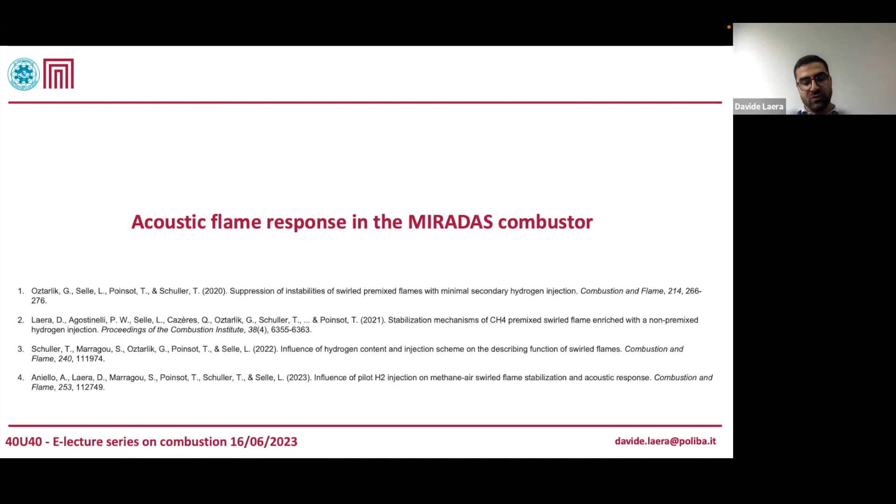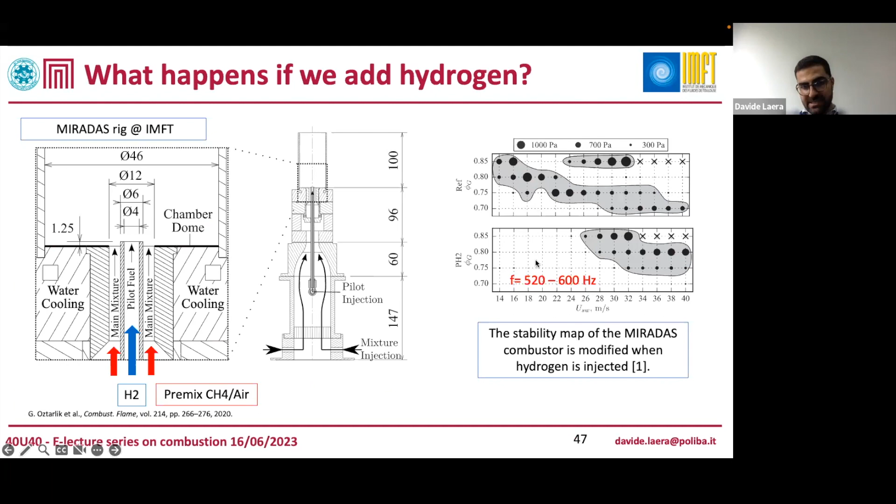Moving on to the Miradas combustor, as we have done before, here you can find a series of articles in which the results that I'm going to show you today have been summarized. In the Miradas combustor, as we've done before, basically what happens is that by injecting hydrogen, we stabilize the system, as you can see from this stability map.

Different from what we have done for the premixed combustor, in the Miradas combustor we didn't want to simulate a self-sustaining limit cycle, but we wanted to focus more on the flame.

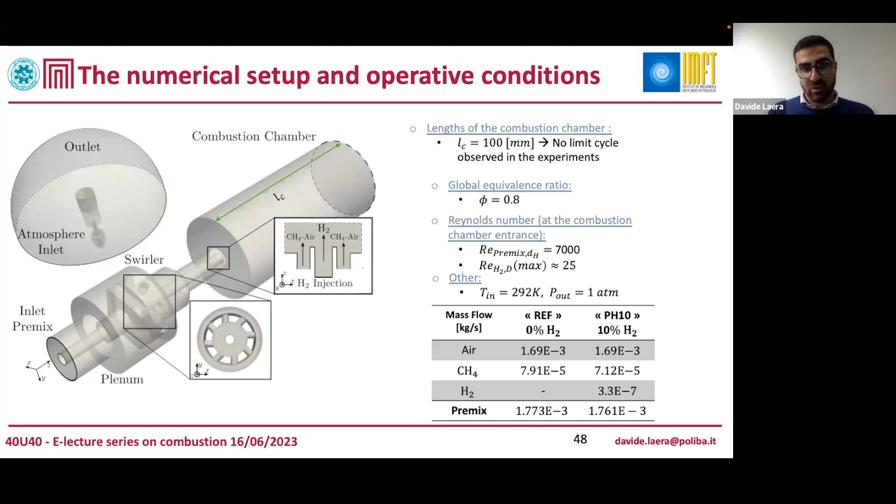In particular, we wanted to compute what is known in thermoacoustics as the flame transfer function. The flame transfer function is nothing more than the response of the flame to acoustic fluctuation, a modeling of the flame that correlates the heat release rate fluctuation of the flame with the upstream velocity fluctuation.

This mathematically translates into the very famous n-tau model in the time domain, or the so-called flame transfer function in the frequency domain, a complex function characterized by a gain and a phase.

What this says is that in response to the acoustic oscillation, the flame will respond with a heat release fluctuation that has a factor n with respect to the amplitude of the velocity fluctuation, and is different in phase with respect to the velocity fluctuation by a phase phi.

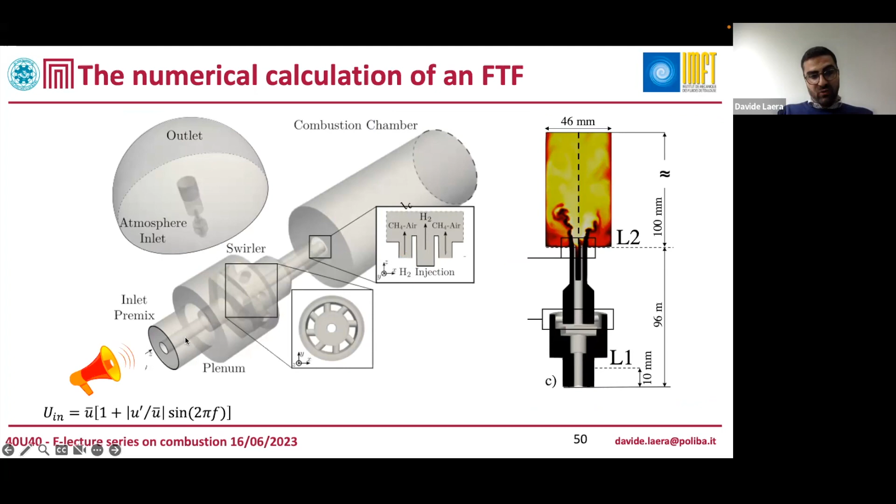To do so, what you can do in LES to compute this FTF is to consider your flame in a stable condition, so you want to avoid self-sustained calculation and force the flame from the inlet by, for example, imposing some harmonic fluctuation at the inlet boundary condition.

Experimentally and numerically, what has been observed in the MIRADAS is, again, this is the phase of the MIRADAS FTF for the reference case without hydrogen, and this function is highly modified when we add hydrogen. For example, this is the case when we injected 10% hydrogen. As you can see, at 240 Hz there is a huge drop in the gain, and at 590 Hz there is a huge phase shift.

I'm going to skip this. So what we have done was exactly try to reproduce the flame dynamics at two specific frequencies.

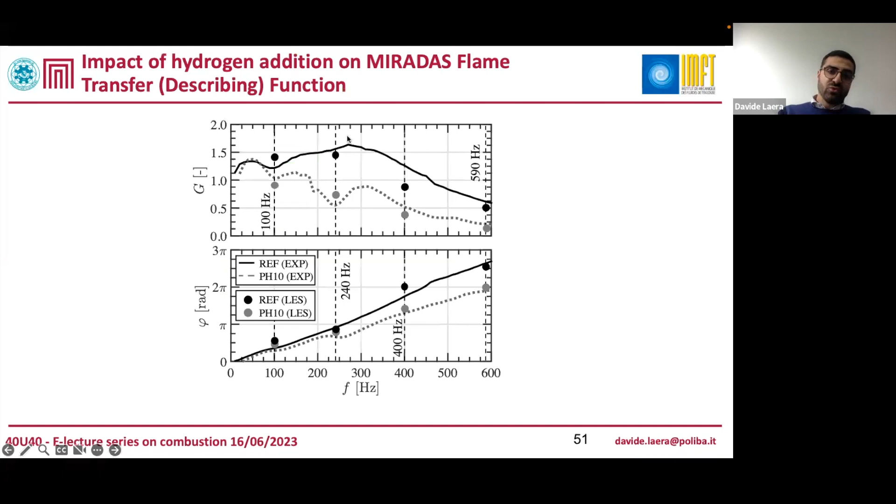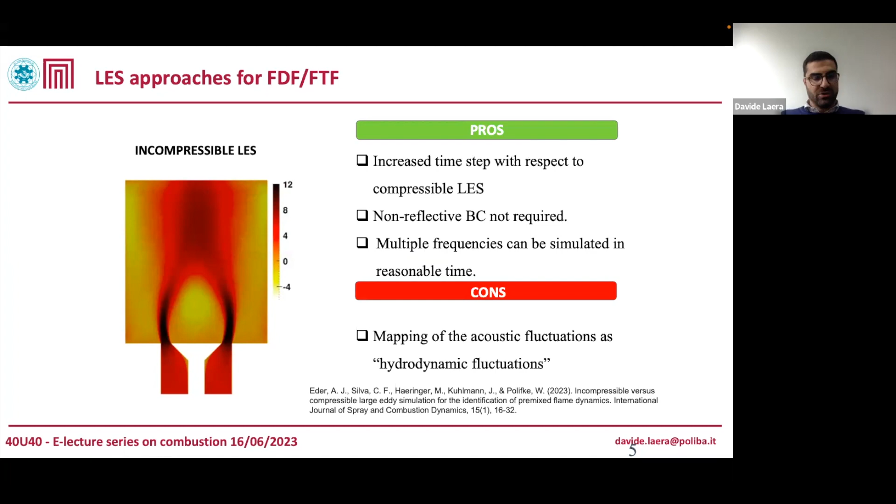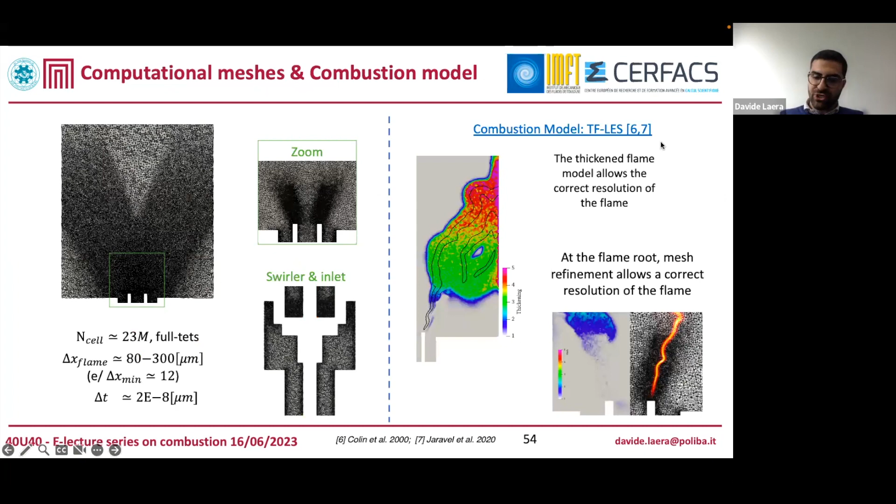To be honest, you can do this using both compressible LES approach, but also incompressible LES approaches have been proved to be able to compute such a flame response. In particular, I point you to this very recent publication from the Polifke group where basically the two methods are compared. It's a really interesting reading that lists the pros and cons of both methods. As we've done before, some of the details of the mesh calculation and computational modeling used are reported.

As for the self-sustained limit cycle, first of all you need to match the stable flame before forcing. Here I report some analysis of the flame shape without hydrogen. This is a classical V-shaped flame stabilized at the injector lip. When we add hydrogen to the system, something more complex happens. The flame is a little bit shorter, and a secondary branch appears at the exit of the hydrogen injection.

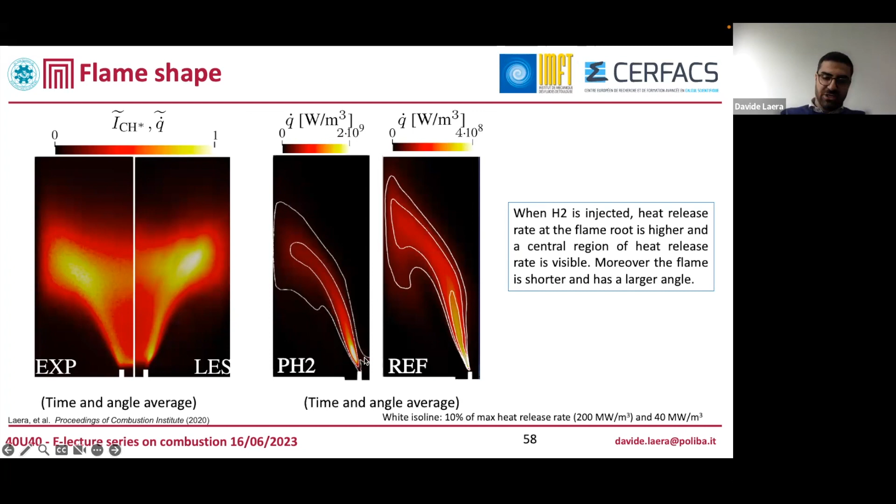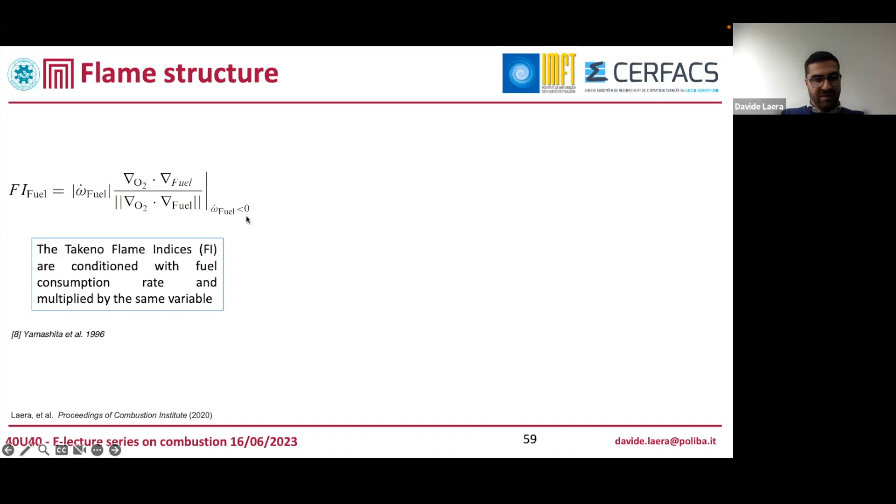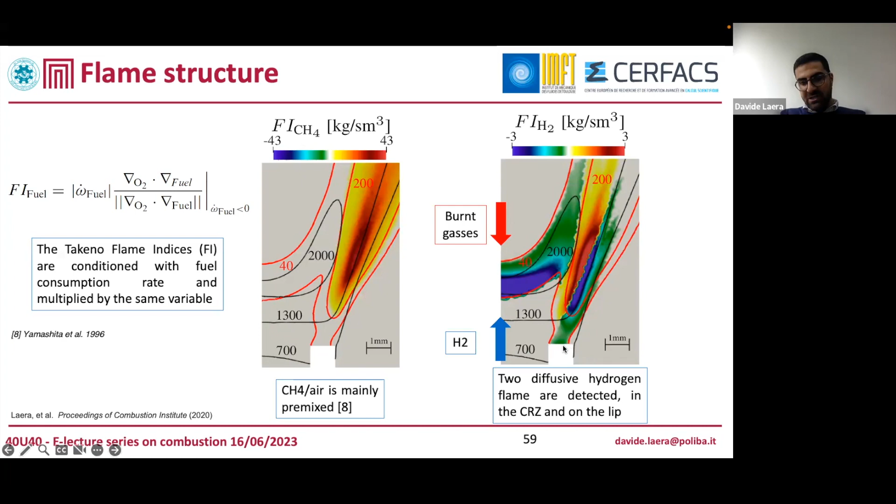In order to better investigate it, we have used the Takeno index, an index that is able to distinguish the regime of the flame analyzed. What we find is that the methane flame can burn in premixed mode, while when hydrogen is injected, two diffusion branches appear: one at the bottom of the central recirculation zone, and also, surprisingly, one at the top of the injector lip, which sustains the main flame. When we increase the amount of hydrogen, a flame lift-off is also observed, because the higher hydrogen injection pushes the flame further downstream.

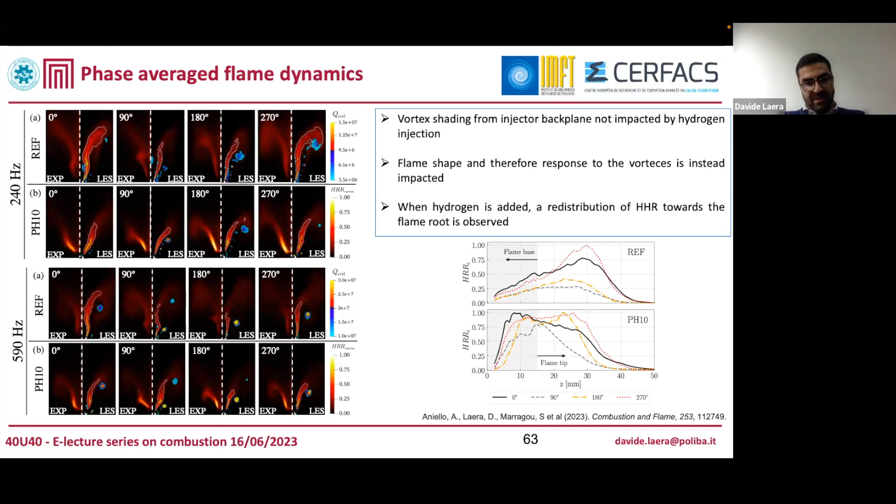The second reason is that, as I said before, when hydrogen is injected, the flame is detached, so it's now a lifted flame, and therefore the flame root also responds to the acoustic forcing. We have observed, especially at 240 Hz, flame root oscillations that here are reported and compared to the experimental observation. This, of course, will change the flame response.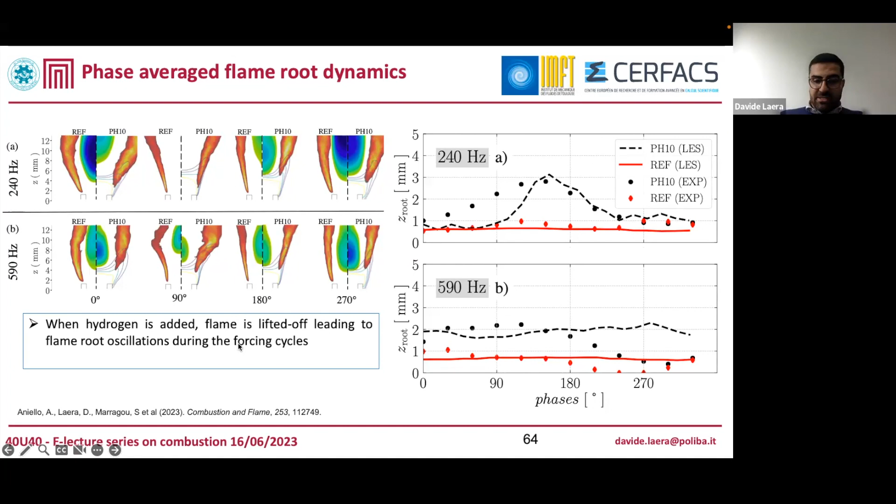Analyzing the two systems at the same time, what we observed is that in the reference case, the flame is always attached to the body. So when forced at 240 Hz, the interaction of the flame with the vortex shed at the exit of the injector will elongate the flame, as you can see here, and will generate a huge increase of the flame surface area due to flame tip roll-up.

On the contrary, since the hydrogen flame is lifted, when forced, the hydrogen flame surface is not increased, but instead the flame is just shifted and translated along the system. This will not generate any increase of surface area, and therefore the amplitude of the fluctuation at PH10 is lower, explaining the lower gain observed when the flame is forced at this frequency.

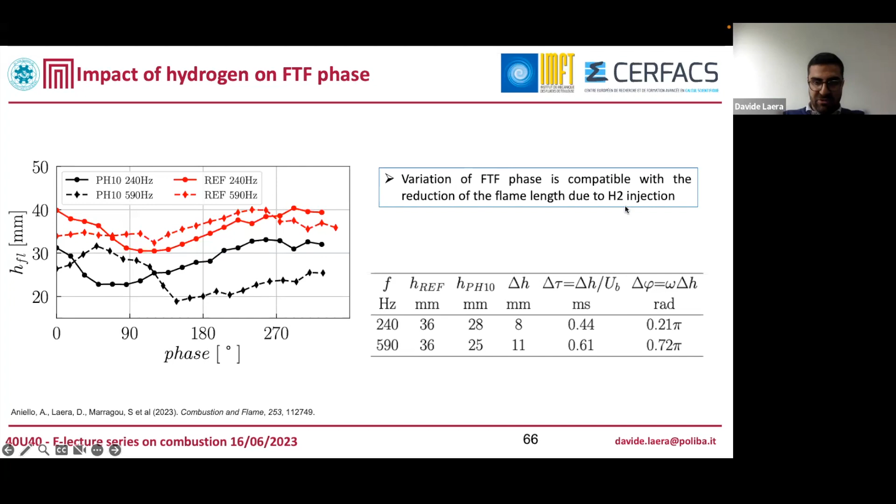For what concerns the phase shift, that could definitely be explained by the fact that when you inject hydrogen, the flame is shorter, so of course this will lead to a phase shift modification that is compatible with the variation of the flame length.

In conclusion, I was a little bit too long, sorry for that.

The applicability of LES to multiphysical problems, such as thermoacoustic instability, has been discussed in this talk. The key message is that if you want to study thermoacoustics, you need specific modeling, because you need to solve a multiphysical problem. You need to account for acoustics, thermal boundary conditions, inlet boundary conditions, and a turbulent combustion model. When you introduce hydrogen, you also need to take care of its thermochemical properties.

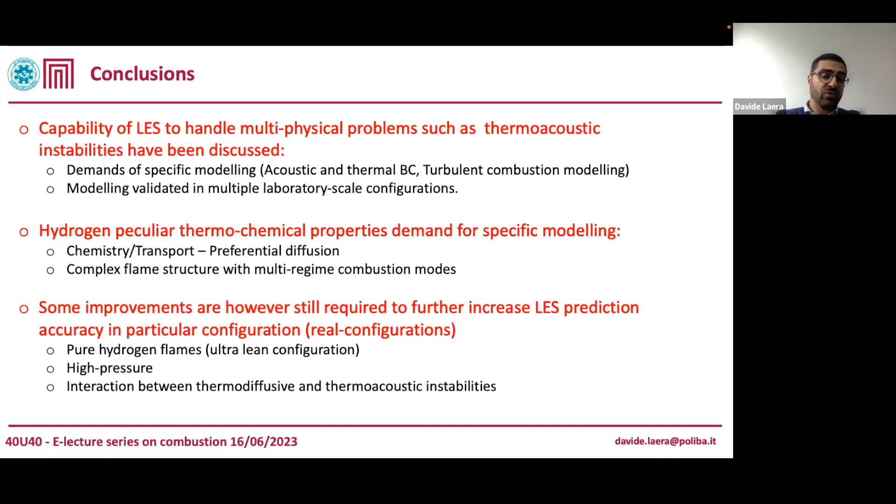Of course, some improvements are still required, especially for hydrogen, for example leading to real configurations, pure hydrogen conditions, and high pressure. I'm going to finish with ongoing projects.

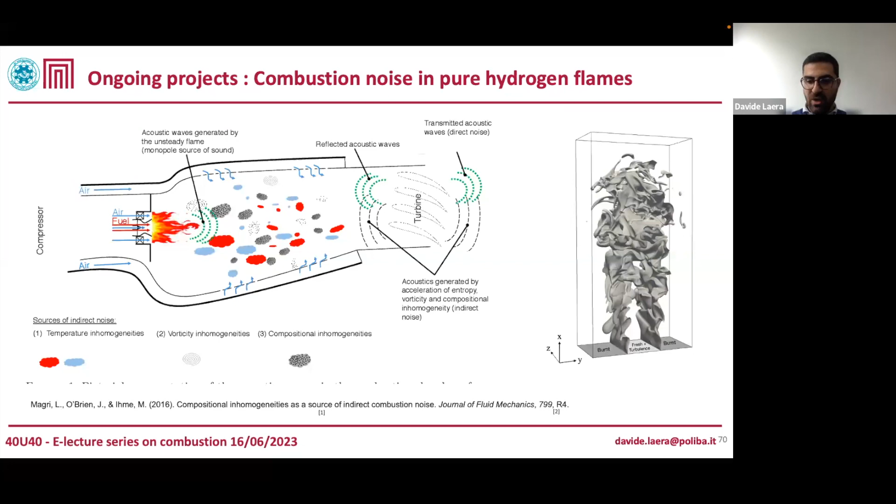As you've seen, nowadays I'm also interested in combustion noise problems of pure hydrogen flames. As I said before, thermoacoustic instabilities are one source of combustion noise, but not the only one. I'm also involved in some projects including ammonia, in collaboration with CNR STEMS from Napoli.

Thank you very much, I was a little bit too long, sorry for that. Let me give special thanks to the PhD students who performed this work, Dr. Agostinelli and Dr. Aniello, and the researchers at Safran for their support on AVBP and everything I know in LES goes to them. I also want to thank the people who invested time in experiments: the IMFT guys, Gorkem, Sylvain, Thierry, Laurent, and the DLR dataset provided by Isaac and Janko, because without good experiments, we people doing LES need good experiments in order to validate our models. Thank you very much.

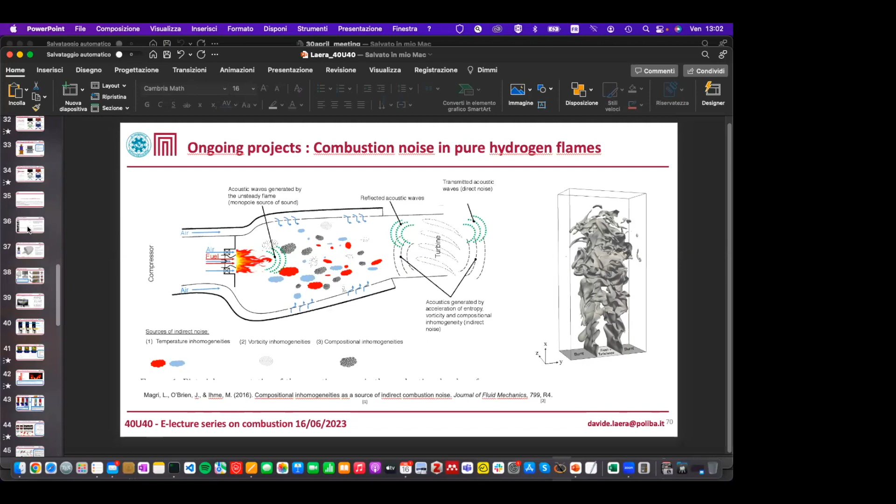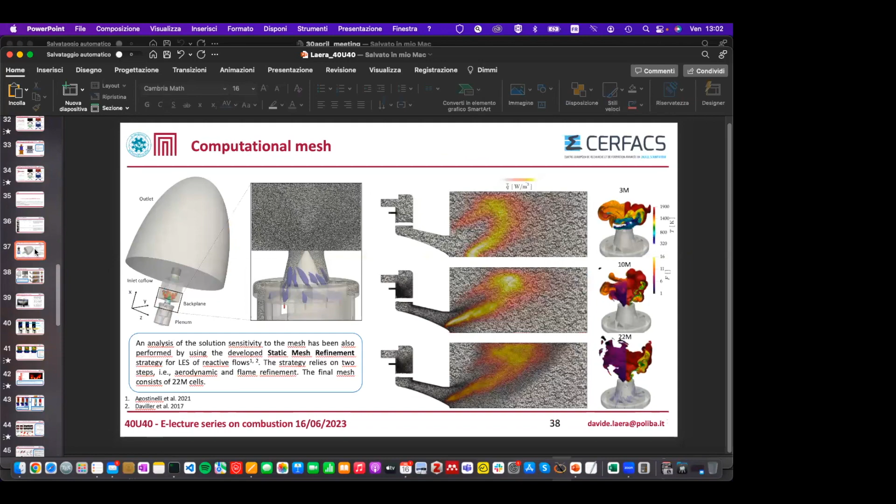Thank you for the very interesting and useful talk. I have a small question on slide 36. You presented LES with the CHT model. Is it possible to predict the transition to instability with such an approach? I'm not sure if in this case it's a bifurcation, but for example, you go from 20 to 50.

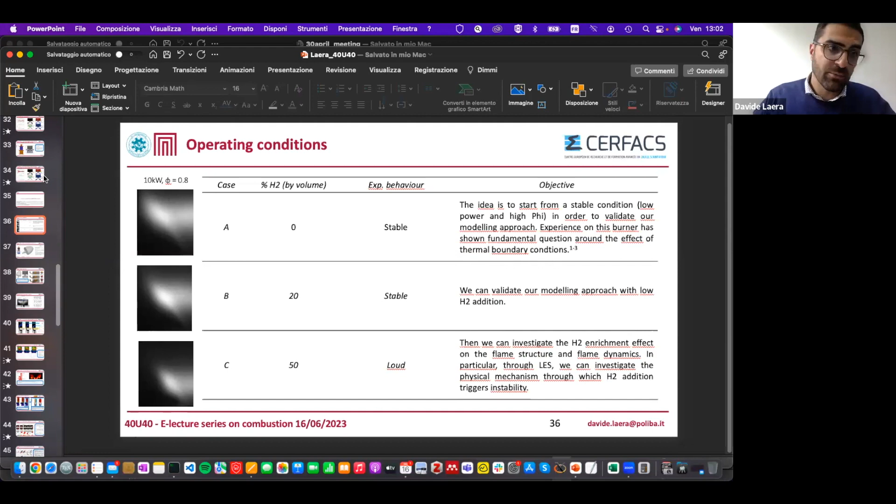Yes, you're right, I was not that clear on this. Of course we did that. So basically here we started from the stable condition, the one that has been stabilized here. This is the test case, exactly the test point presented before: pure methane, 10 kilowatts, stable with CHT. It's not the CHT itself, but the fact that you must have the correct flame shape, because the flame shape will respond to acoustics correctly, and the thermal boundary condition will impact the shape of your flame. So to get the correct stability, you must have the correct acoustics and the correct flame response. Then, starting from this stable point, adding hydrogen...

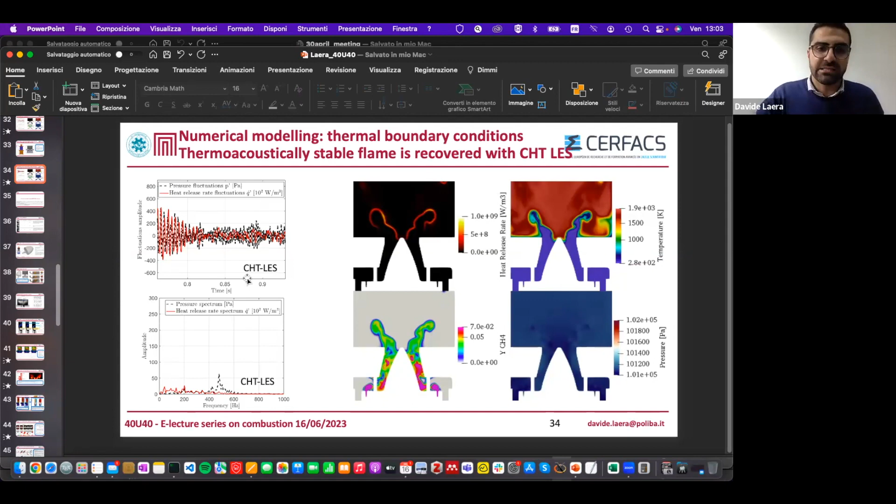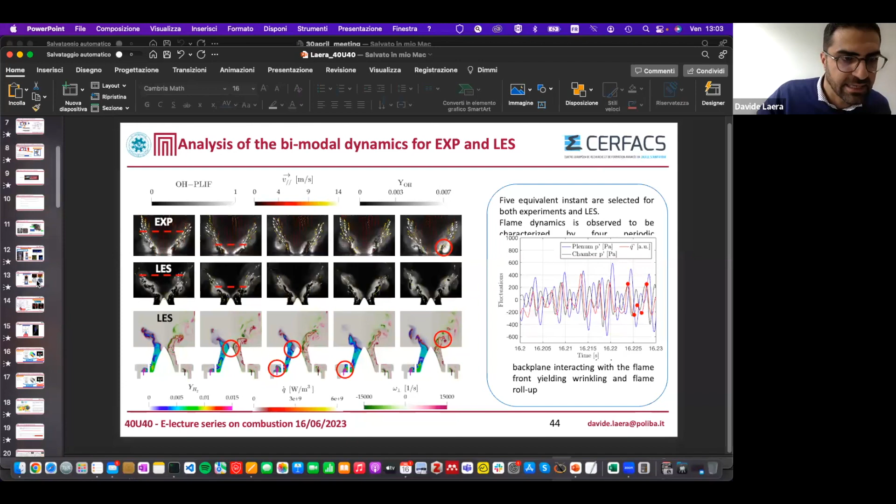This was done. I don't have the video right now, but there is a video showing this clearly... actually, I have it here. It was at the beginning of the talk where I presented the case. So this is a stable flame, and when you add hydrogen, you trigger instabilities. So definitely the transition can be predicted with LES if you have the good model.

So here you can see that as soon as hydrogen enters at the correct amount, 50% in volume, the instabilities trigger themselves automatically.

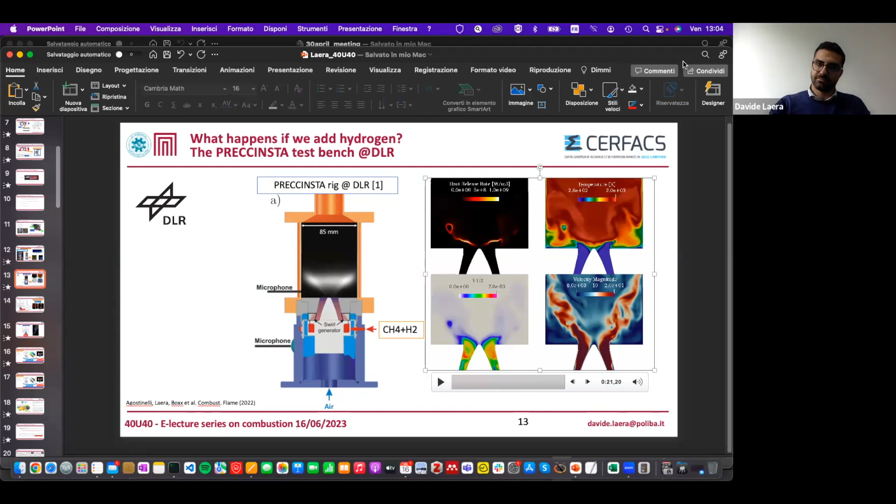You showed that LES is a powerful tool and can be quite accurate in predicting thermoacoustic instabilities. My question is, on the practical, industrial side of things, do you think industry will use LES for design purposes, or will we need to rely on lower fidelity models, low order models?

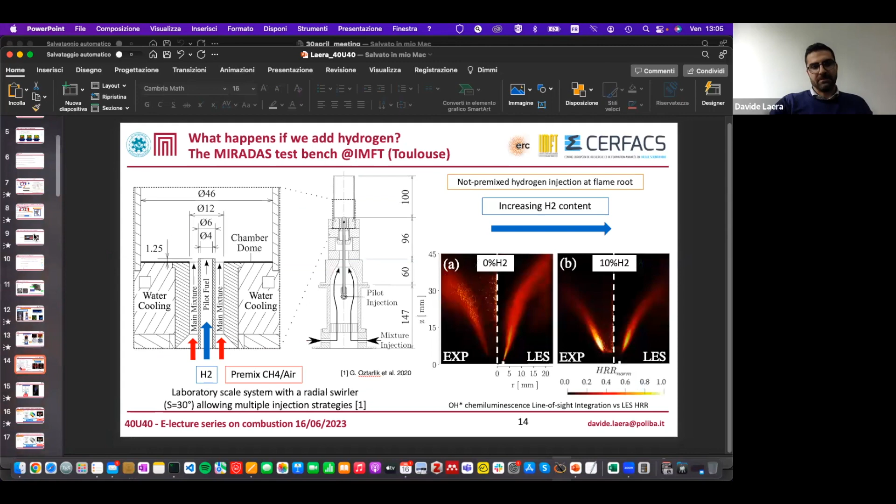Absolutely, it can initiate the advancement, depends a lot on promoting the use of hydrogen in industrial systems or gas turbines. Yeah, absolutely, they need to use both. It's not reasonable in a design phase to perform 100 LES simulations, it's not possible. You definitely need to perform a couple of good simulations in order to get, for example, the good flame response, the flame transfer function, flame describing function, as we did for the Miradas, and then use that transfer function as an input in low order modeling, acoustic modeling, where it's easier to change geometry, length, acoustic characteristic properties, in the design phase.

When the design phase is finished, of course LES could be used to validate or optimize. My idea is that all the tools need to work together in a synergistic way, making full use of the advantages of all tools. But LES is the tool to understand physics. If you want to understand what really happens, you need LES, because with a validated LES you also have access to a series of fields that I showed you before, like DMD, where you can understand the coupling between equivalence ratio fluctuations and pressure fluctuations. It's a really powerful tool because all the information is there for you, it's just up to you to exploit it and find your answer.